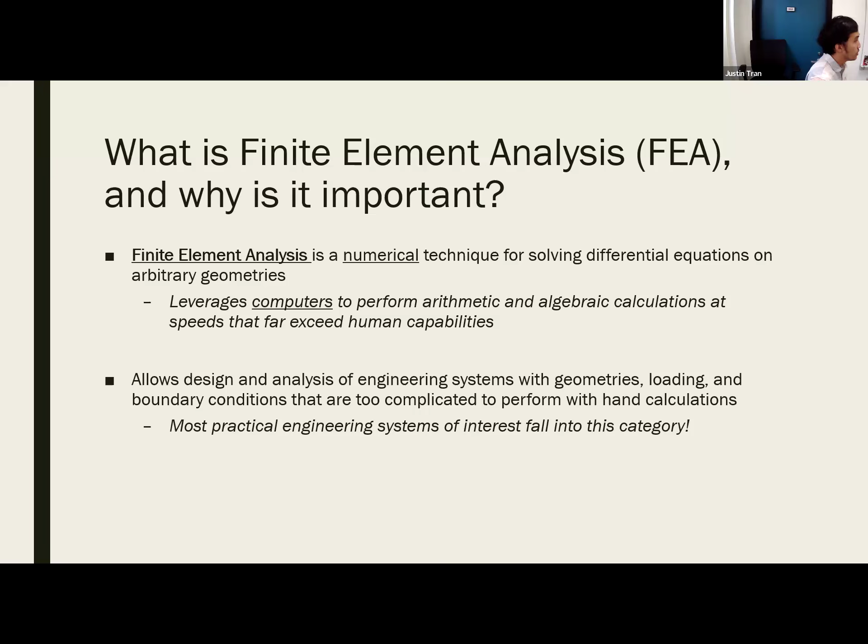So to illustrate this further, when I think of engineering analysis, I think of three broad categories of types of analysis that people generally do.

The first type is what I define to be analytical analysis. This is the traditional pen and paper calculations that you would do in a typical theory-based class. The idea with analytical methods is that you have a governing equation that you're assuming governs your physical system of interest. You solve that governing equation for the variables of interest, and you obtain some result.

The good thing with analytical methods is that it's very fast and inexpensive. Pencil and paper is very cheap compared to an engineering rig or setup, or even just a computer. But you're very limited to very simple problems, because it's very hard to add complexity to these pen and paper calculations.

On the complete other side of the spectrum is what I define to be experimental methods, which would involve actually testing out some physical situation and collecting measurements and data to learn more about the system. The best way to learn about a system is to just try it out, observe, collect data, and see what happens.

Experimental data is always the best. There's very little questioning of experimental results because it actually happened. There's really no question whether this is real or not, because it actually happened.

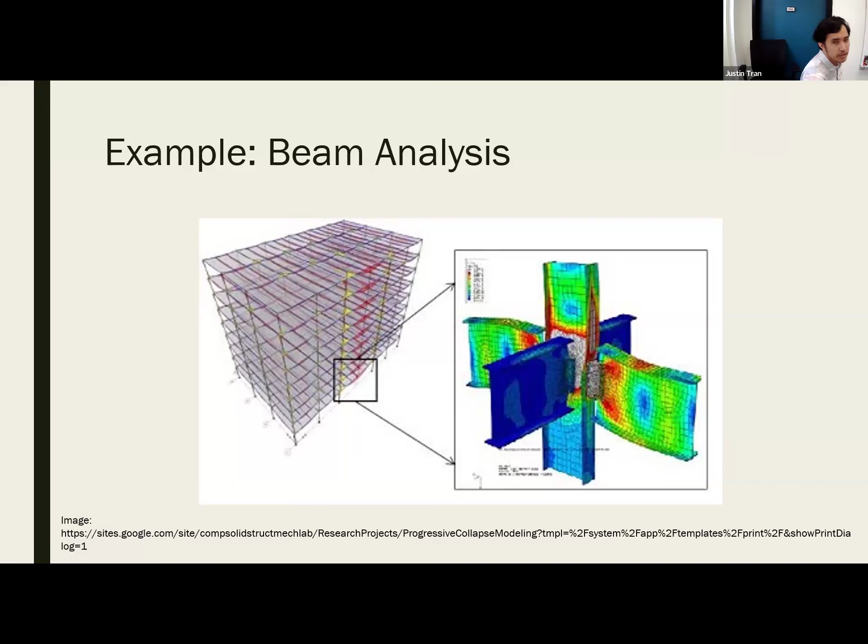One thing about FEA is that you're not just limited to structural simulations. For this class we're focusing mostly on structures, since that's generally the most helpful for mechanical engineers, but you can also run heat transfer simulations and fluid mechanics simulations — we'll touch on that a bit near the end of the summer session. The rule with FEA is that as long as it's governed by a differential equation, you can simulate it.

But once you start to add some complexity, you can see here we have a turbine blade being subjected to hot gases in motion, which heats up the turbine blades. What you're looking at here is a heat map of the temperatures on the turbine blades — very warm near the center, getting cooler throughout. This is not something you can solve by hand practically. You could solve it by hand if you have an entire weekend to do it, but most people don't want to do that — they want to spend the weekend doing other stuff.

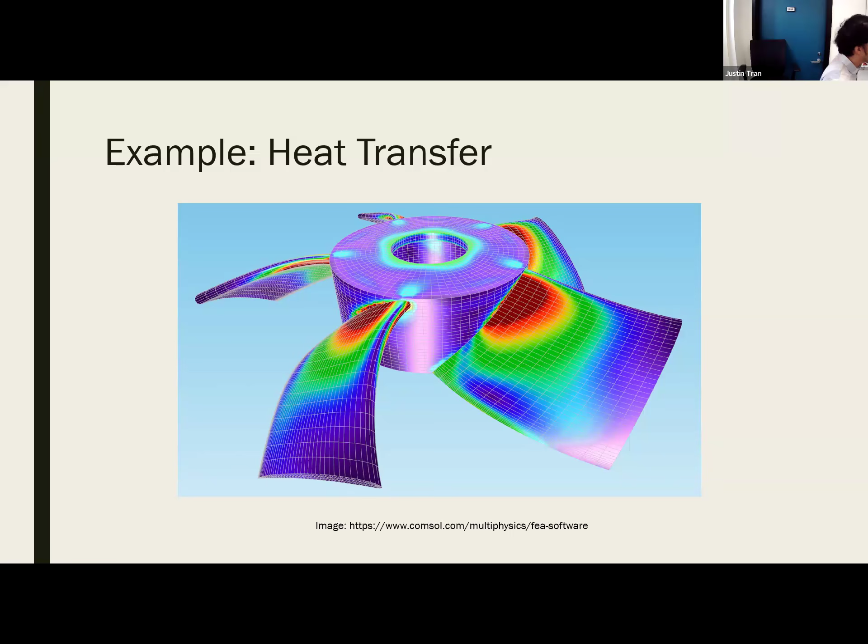So finite elements is a very powerful tool, there's no denying that. I think increasingly as computers get more and more powerful, finite elements is going to be a useful skill to have, because that's something more and more employers are looking to add to their plan. Any questions on this so far?

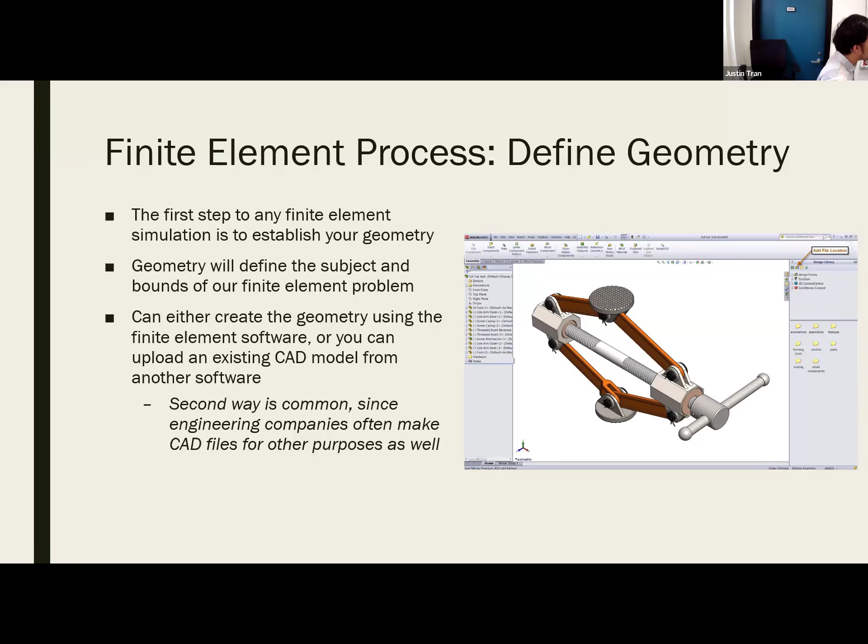Okay, so the first step is to define the geometry. Every finite element simulation requires you to define your domain, the part or system you're going to run the simulation on. For a more applied class like this one, using software like ANSYS, the geometry is defined by a CAD file, usually produced in another software, most commonly SolidWorks, which is taught almost ubiquitously in engineering programs. Sometimes we'll create the geometry within ANSYS itself, since it has some basic CAD tools we'll use in Activity 1. But for the most part, we'll be importing CAD geometry. That's always your first step, because you can't run a simulation without it.

Next, we need to specify the material properties. It's not enough to just define your geometry, you need to specify what it's made of, because different materials behave differently when exposed to forces, loads, and boundary conditions. Whether you have a metal like aluminum or steel, versus a composite material versus a polymer like plastic, all of those behave differently. So you need to specify what material your geometry is made out of, and sometimes you may need to input the material properties by hand.

Quick question: when it comes to SolidWorks, will we actually use the material editing in there, or would we make the geometry and then do editing within ANSYS?

That's a good question. There are ways to import the material editing from SolidWorks into ANSYS, but for this class, I'm going to show you guys how to edit it directly within ANSYS itself, just to be more flexible.

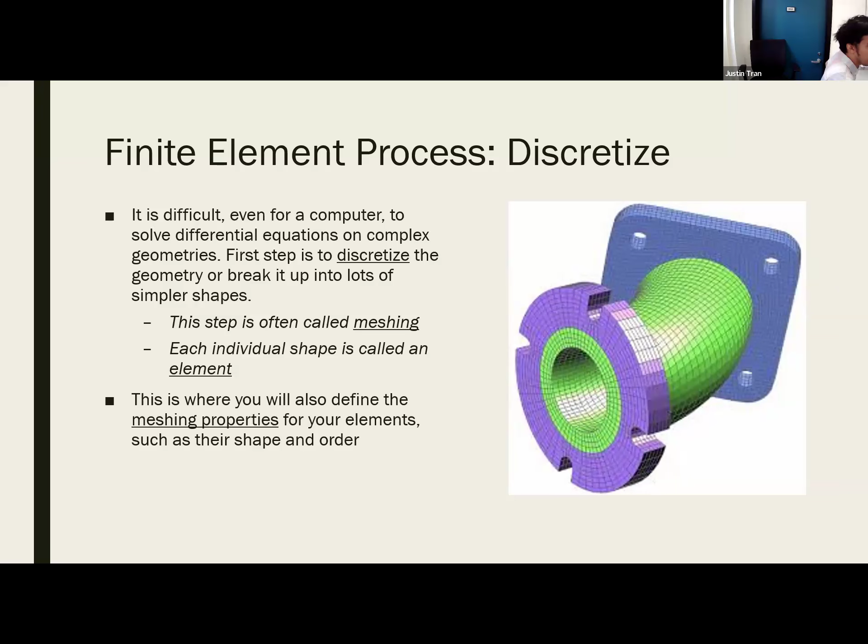All right, next we have to apply boundary conditions. Boundary conditions basically define any kind of external effects or external forces that are going to be affecting your geometry. Because even with a powerful computational tool, it's going to be impossible for us to simulate an entire engineering system. Most of the time you're only going to be simulating just a small portion.

So just take an example. I always get a lot of people from Formula SAE here, and they want to throw their entire car into ANSYS. And I said, maybe that's a little bit too difficult to do. Maybe let's look at a few components together. But when you do that, you have to define how those components connect to other components that are not being simulated at the same time. And that's what the boundary conditions represent.

So any kinds of fixed constraints, any kind of places where your geometry is going to have no deformation, any kind of external forces, external pressures, distributed forces, those are going to be in the boundary conditions. We are going to talk about boundary conditions a lot in this class. Probably meshing is what we're going to talk about the most, boundary conditions probably the second most. How you define your boundary conditions obviously has a big impact on your result, and you want to make sure you do that correctly.

Okay, next step is a step called assembly. If you're just using the software as a user, this is a part that ANSYS essentially hides from you, but it's important to know what's going on. What's happening underneath the hood in ANSYS is that it's generating this matrix set of equations to solve and then solving that system. I would say maybe about halfway through the class we're really going to get into the theory behind finite elements, and you'll see how a system like this is generated from a finite element problem.

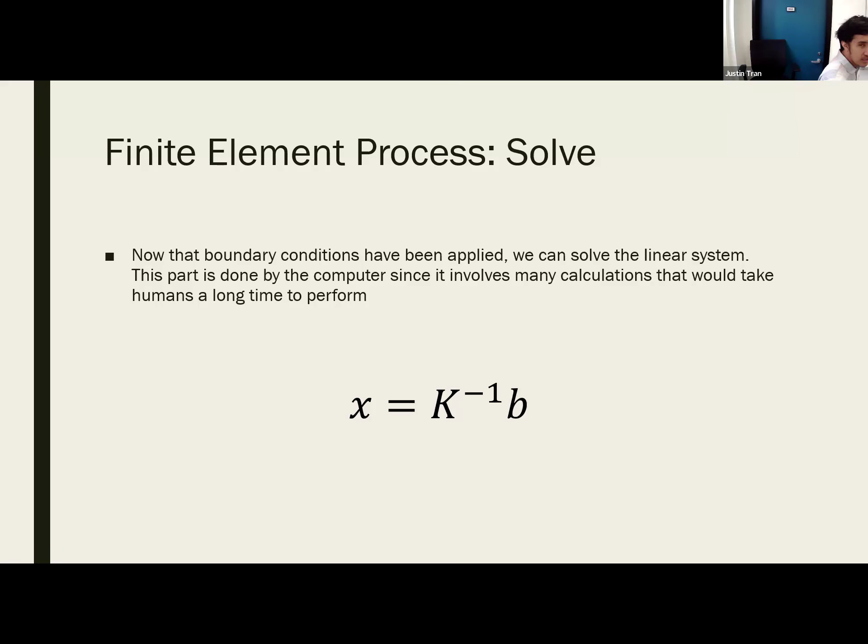Okay, so that's the finite element process. That's something we're going to follow for every ANSYS activity, every project we're going to do together. Any questions on any steps in this process here?

Okay, good. So like I mentioned, we are going to spend some bit of time on the background knowledge, and I get this question every time I teach this class, so I know everyone's itching to use ANSYS, but we do have to learn background knowledge, right?

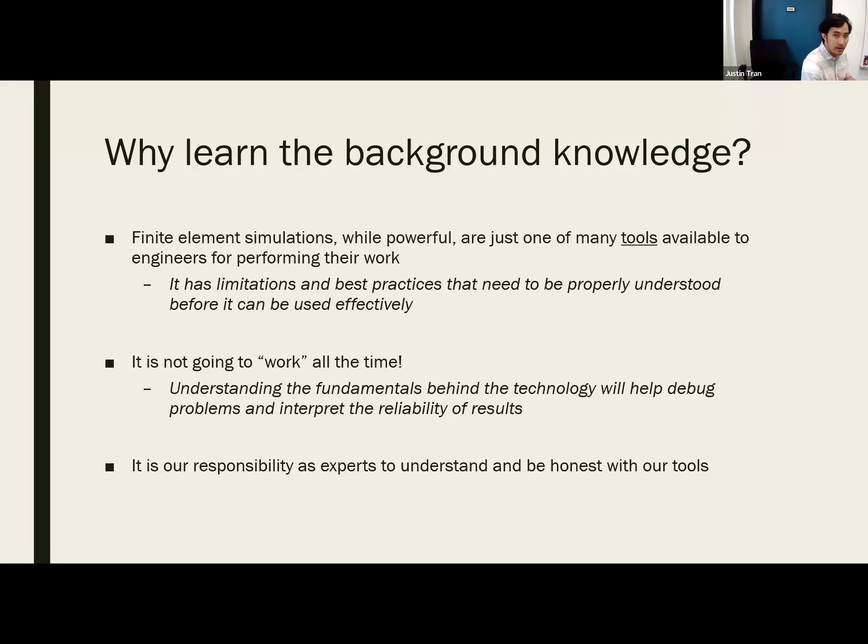Okay, let me give you an example from another professional that I think people have a better understanding of. If you think about your veterinarian—your veterinarian is someone tasked to take care of our pets. On the one hand, we expect them to know procedural skills: how to give a shot to an animal, how to take blood pressure, maybe performing tests on their eyes and ears. But we also expect them to know conceptual information and background information in terms of what they're doing, right?

We also expect professionals to know why and when to take certain actions, like giving animal shots. We don't want them to just randomly give our cat a shot because they feel like it. We also expect them to interpret our pet's signs to know when they're sick.

And it's the same for us. Anytime you have a professional, there's always an expectation that they understand why they're doing what they're doing. That's the reason why you take a course.

Before the syllabus, we have a couple more things to cover, starting with why ANSYS. We're going to focus on ANSYS in this class, but ANSYS is not the only finite element software out there.

There are a lot more specialized softwares for specific problems, and also a lot of generalist softwares. Another one very parallel to ANSYS is called Abaqus. So why do we use ANSYS in this class?

ANSYS has a free student version, which is a big motivator, I'm not going to lie. One thing I'll show you today is how to download the free student version of ANSYS onto all of your personal computers, and that's available for everyone.

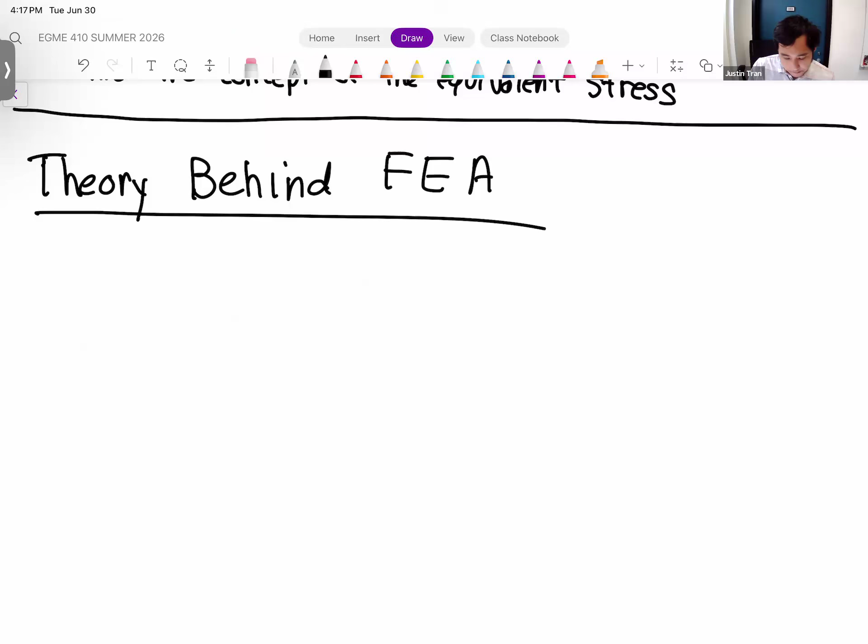Like I mentioned earlier today, for the most part this class is going to be application focused. ANSYS is going to be a big part of what we're doing here daily. But we still need to understand a bit about the theory, what's happening underneath the hood. Because if you don't, whatever software or tool you end up using is just a black box. It's not necessary to understand all the intricacies in the coding and structure behind every software, but you should understand a bit of what's going on so it's not completely foreign to you.

Okay, so just to remind you about finite elements: finite element analysis is basically a technique — not even really a numerical technique, but a technique — for solving partial differential equations.

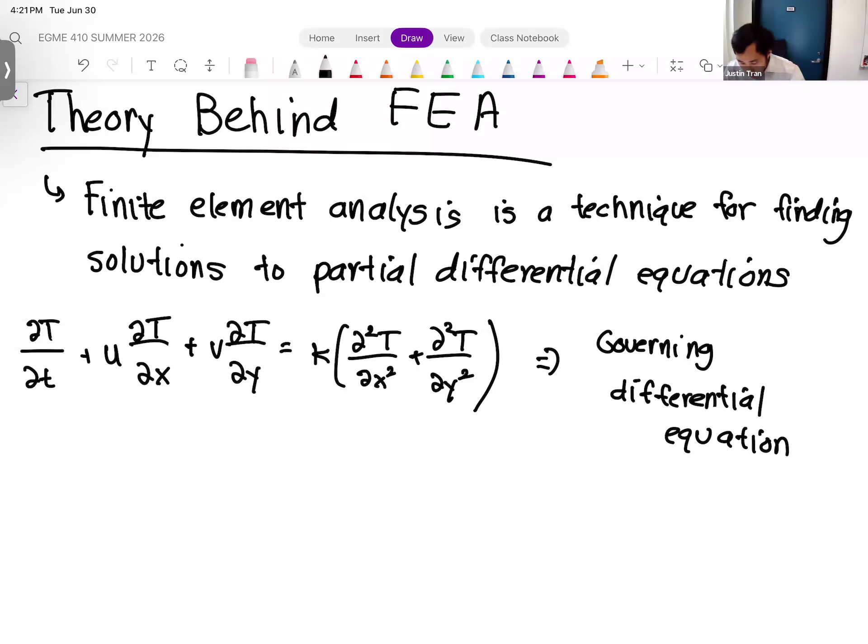Every physical system has something like this. For fluid mechanics, we have the Navier-Stokes equations. For solid mechanics, we have the equations of elasticity. There's always going to be some underlying equation, and even if it's not obvious, there's probably some fundamental conservation of energy, conservation of momentum, or conservation of mass equation that you can use to form an equation like this.

And so the idea with FEA is that we can apply it as a technique to transform this. The idea is to take a problem governed by this differential equation, but instead of solving that differential equation, we solve a different mathematical problem - an algebraic one instead. So by utilizing FEA, we transform this into a matrix set of equations.

I've just drawn generic matrices here, but what we've essentially done is transformed this into a matrix set of equations - our traditional N equations and N unknowns. So here we have a square matrix of coefficients that's going to be multiplied by a vector of unknowns.

The unknowns are typically what you're solving for - things like temperature, deformation, stress, and so on. And on the right-hand side, that's where we have external effects like forces and boundary conditions.

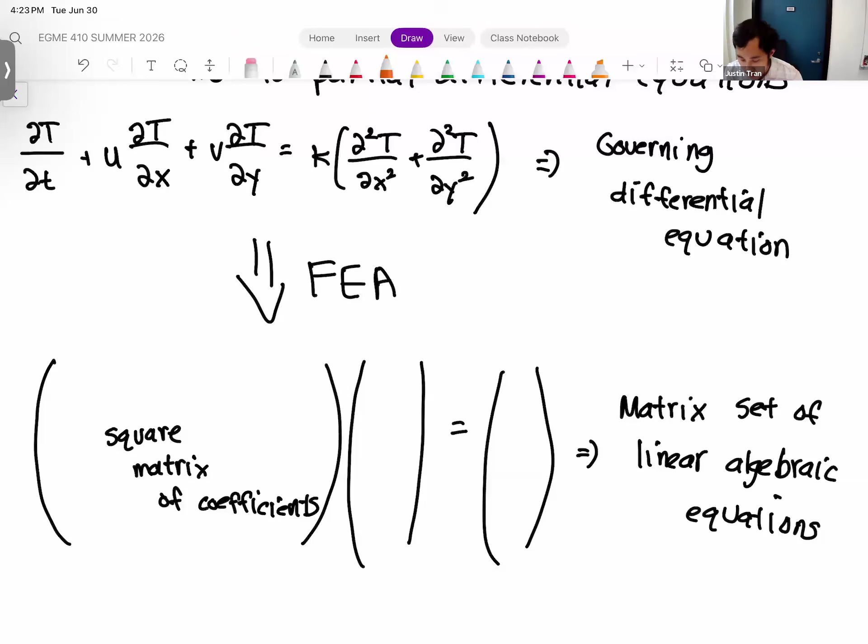This matrix, as I mentioned, often has millions and millions of rows or columns. So we have a mathematical problem that's impossible for humans to solve. We go through all this effort through FEA, and we get a mathematical problem that's impossible for humans to solve. So you can see why people were not too impressed with FEA to begin with.

But as computing and computers developed, we found out that computers are very good at certain tasks, and one thing computers are very good at is algebra. That's when FEA really started to take off, as we found that the way computer processors are designed, these linear algebra problems are very efficient to solve.

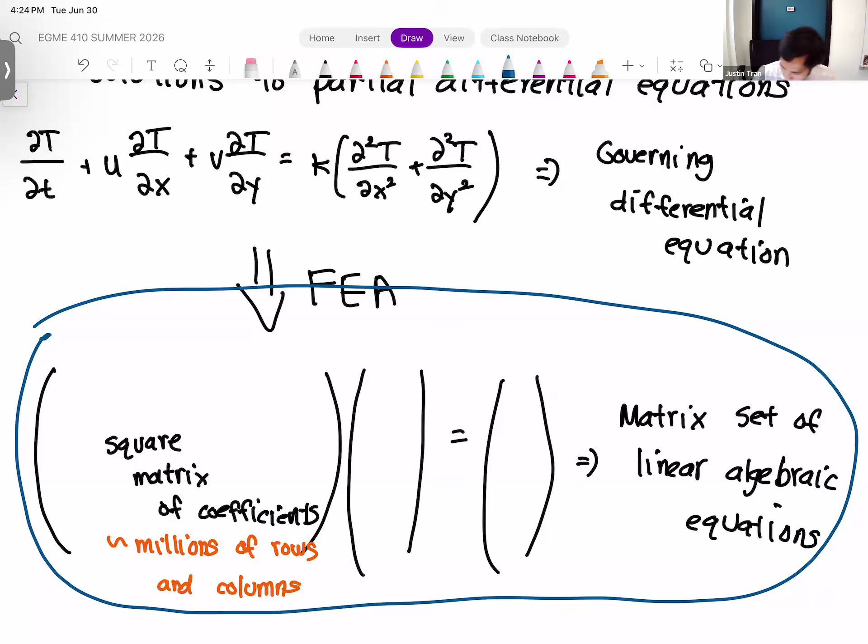That revelation spawned a whole set of different computational techniques and tools, and we're still making use of it today. A lot of what we understand about artificial intelligence, the dominant methods for training these networks, are based on linear algebra.

So basically the gold rush of computational engineering is that if you can take your problem and formulate it in terms of an algebraic system of equations, then you have a computational technique on your hands, and maybe something that's going to redefine an entire era of technology. FEA was obviously developed a lot earlier than AI, and this was kind of the main method that sparked that.

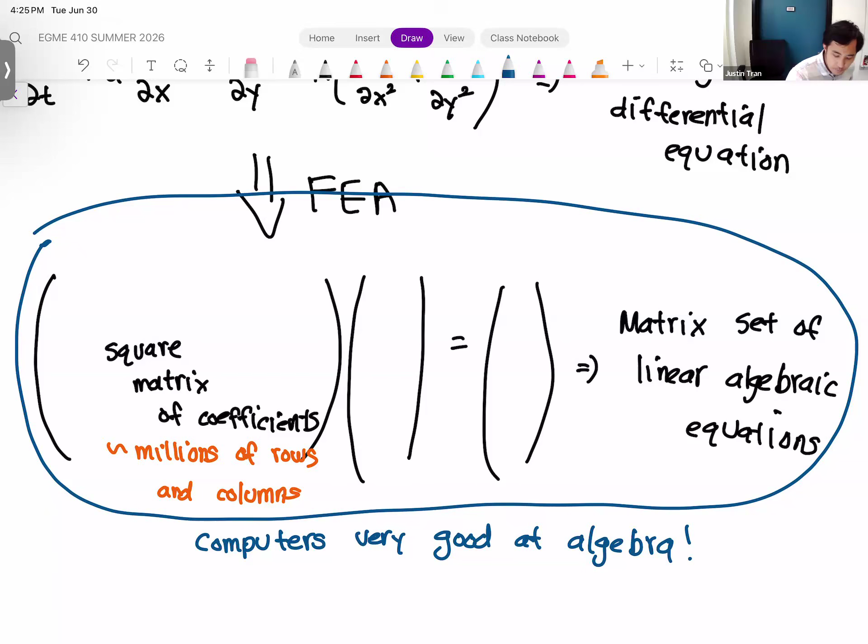Once that connection was formed, people started to connect the dots with everything. People started to realize, at least from an engineering perspective, that most engineering systems are governed by physical laws - conservation of mass, conservation of momentum, conservation of energy - and those have corresponding partial differential equations.

So whether you're designing a building or designing a heat pump, there are governing equations that govern this behavior. We can use FEA to basically formulate those governing equations for a specific system into a set of algebraic equations.

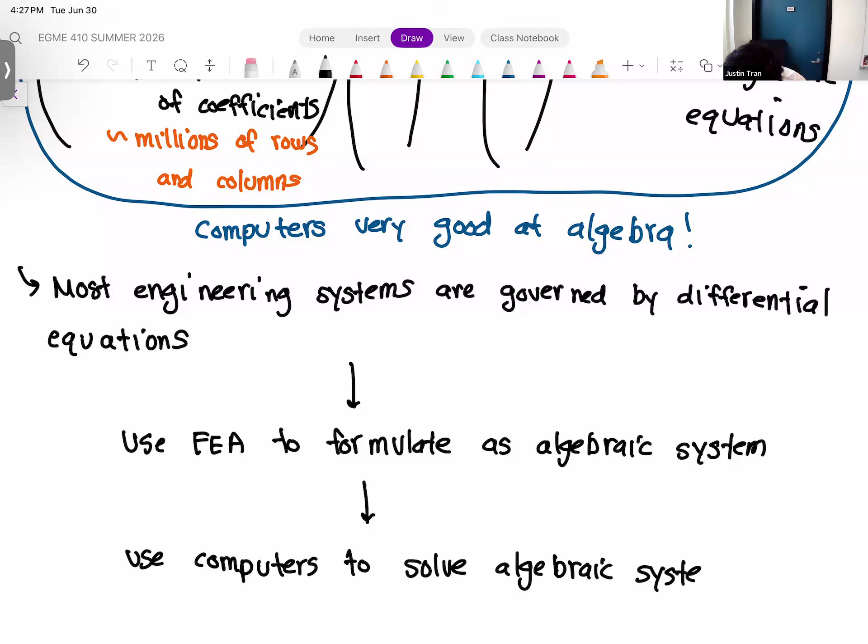And then once we have that solution from the computer, we can use that to inform our engineering work, whether we're doing design work or analysis work. This really started to become a tool that we can use for any kind of engineering work.

So that's kind of the thought process of using FEA. And eventually from this, a lot of different softwares started to form, just because even though it is possible to write your own FEA code, if you eventually come back for grad school, we do have a course on that. That's 541, I just taught that this past spring.

If you were interested in learning how to do that, there are methods. But I would say for the most part, most engineers and most people that use FEA use it as a user, not necessarily from a developer's perspective. So that's the nitty-gritty of FEA in terms of forming this algebraic system and writing the computer code to solve it. Most people are not that interested in learning about these things, and so these are the parts that are automated by the software.

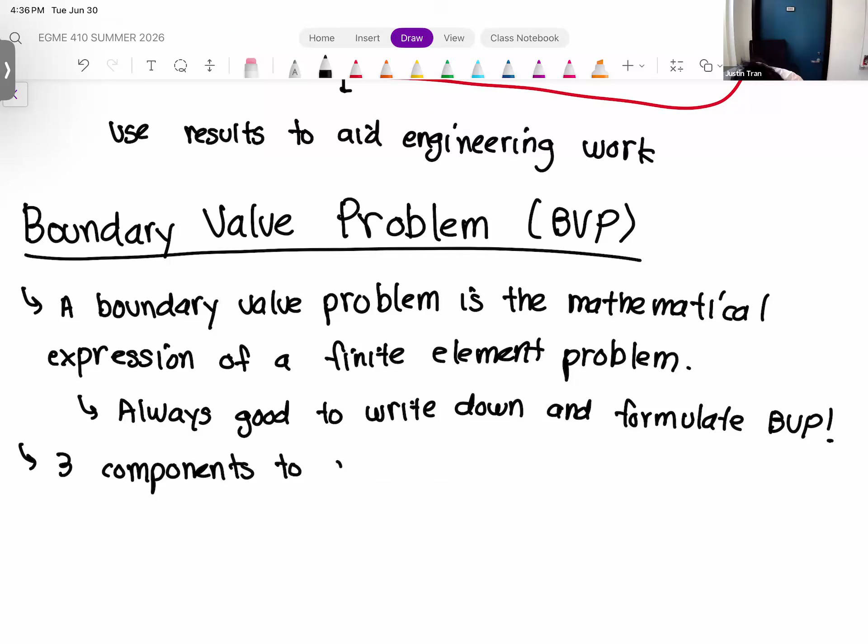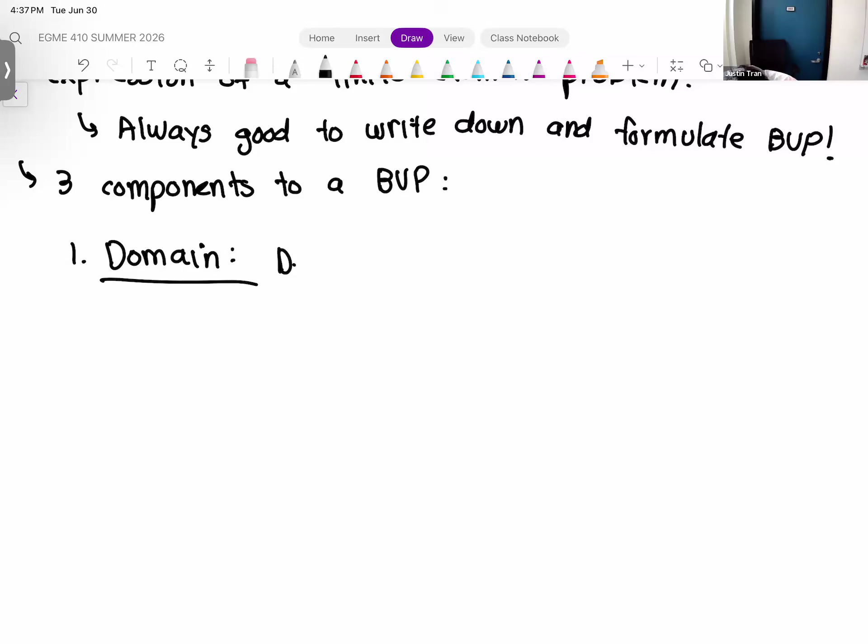For boundary value problems, there are really just three components to know. The first is your domain. The domain is another name for what we call the geometry - it defines where and what we want to solve our equation on. For the most part in this class, our domain is going to be defined by the CAD file that we import into ANSYS. So the CAD file defines the geometry on which we're going to solve it.

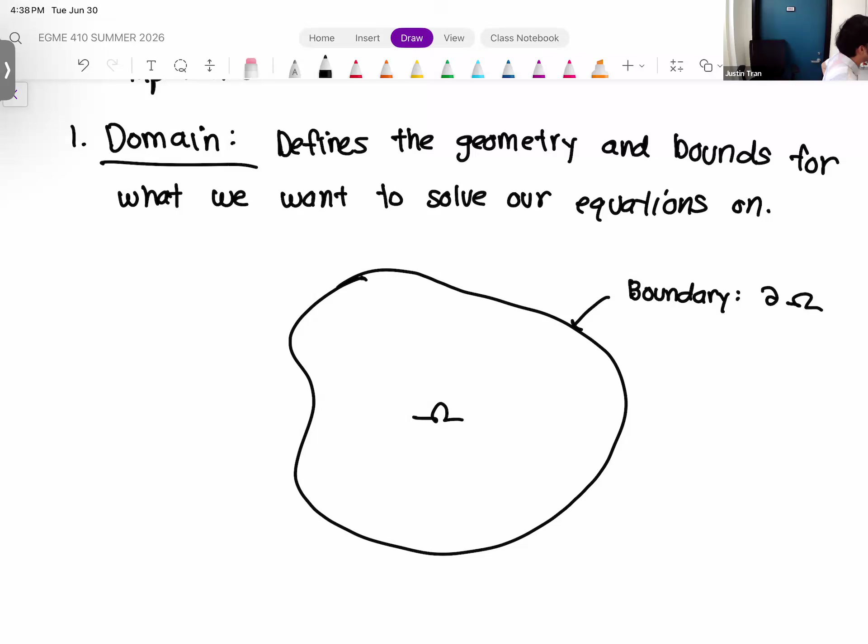A little bit of terminology: for a typical boundary value problem, let's say we have our generic domain shaped like a potato. The domain itself is usually given the symbol omega, and the boundary of the domain is usually defined as partial omega. That's the notation typically used in textbooks and scientific papers. We're not going to use this notation all too much in this class - I'll typically just refer to the boundary as the boundary, but this is the terminology and convention typically used if you read more.

This may seem like the most obvious part of a boundary value problem, and it's not the part that people think about, but it's always good to ask: what is an appropriate domain? What is an appropriate geometry for the question I'm trying to answer with my simulation?

Because sometimes it may not be obvious, your choice of domain and your choice of geometry often has a big impact in terms of how much you can do with the simulation, just because of the limitations we have with the computers and the software here. But it also has a big impact on the cost as well.

So I'll give you an example. This was several years ago, so I think it's safe to tell this story because that student is long gone. For a student's final project, they were interested in simulating a workout station at a gym. Specifically, they were looking at one particular machine, which was seated rows.

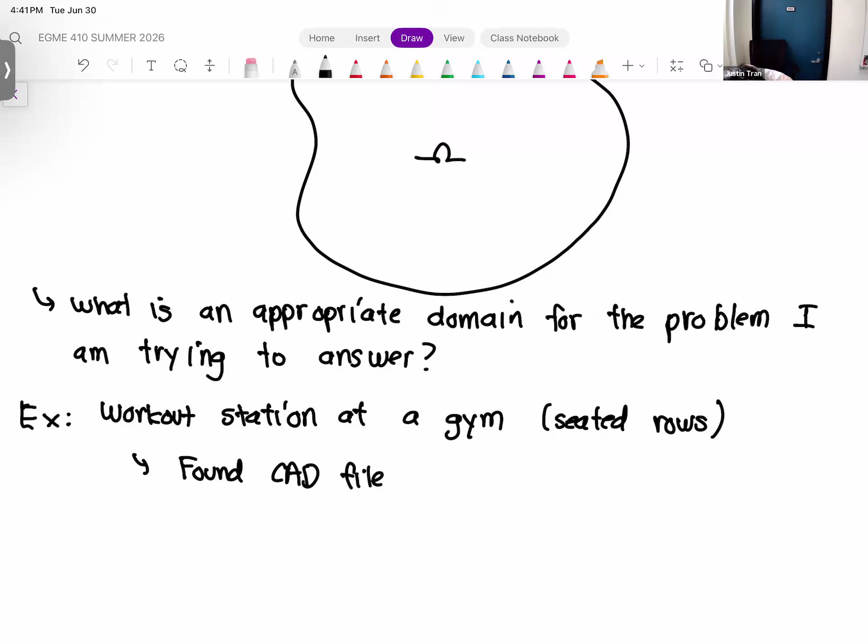Naively, what they did was take that CAD file, import it into ANSYS, and try to run an analysis on it. They were having a hell of a time trying to mesh it because of the complexity of the geometry.

So the student comes to me and describes everything going on, from the perspective of, 'Professor, I'm getting these error messages in ANSYS when I'm trying to mesh, and I'm not quite sure what to do.' I rephrased the question and asked, what aspects of this machine are you actually interested in analyzing? We talked it through.

It turned out they were actually only interested in the load-bearing components — the parts of the machine that are going to be under stress when someone does a seated row. So it wasn't necessary to model all of the other components that don't contribute to that load-bearing portion.

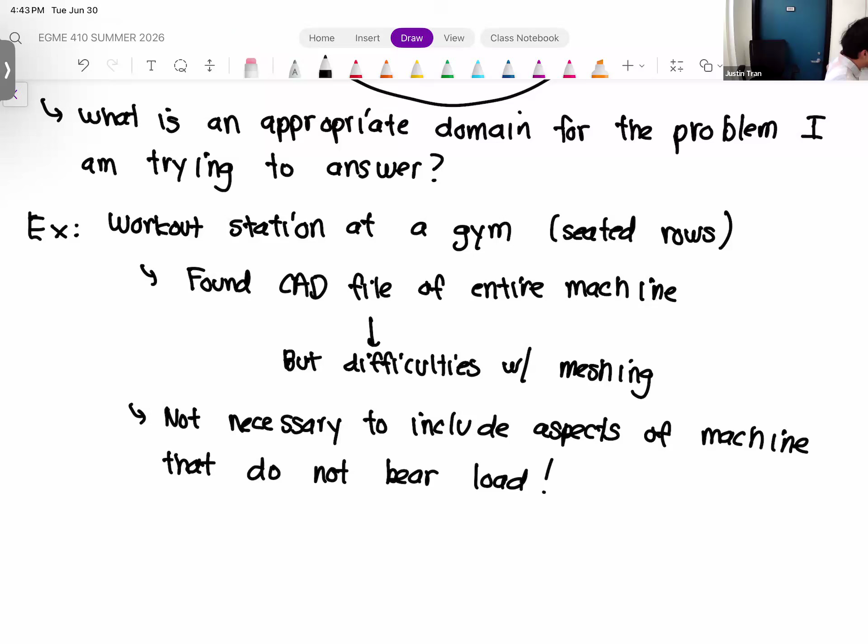All that extra geometry does is add complexity to your simulation. It adds a lot of dead space — things the simulation has to mesh just because that's a requirement, but that mesh isn't doing anything. It's just adding cost and complexity for almost nothing.

Through that process, we were able to extract just the components he needed, and he had a much easier time running the simulation from there.

A lot of times, what may seem like an obvious question — what's your domain, what's your geometry — when you think about it from the perspective of running a simulation in ANSYS with finite elements, every portion you include in the CAD file is going to be simulated. So the question rephrases itself in an interesting way, because you have to think about what's actually necessary for you to do this analysis.

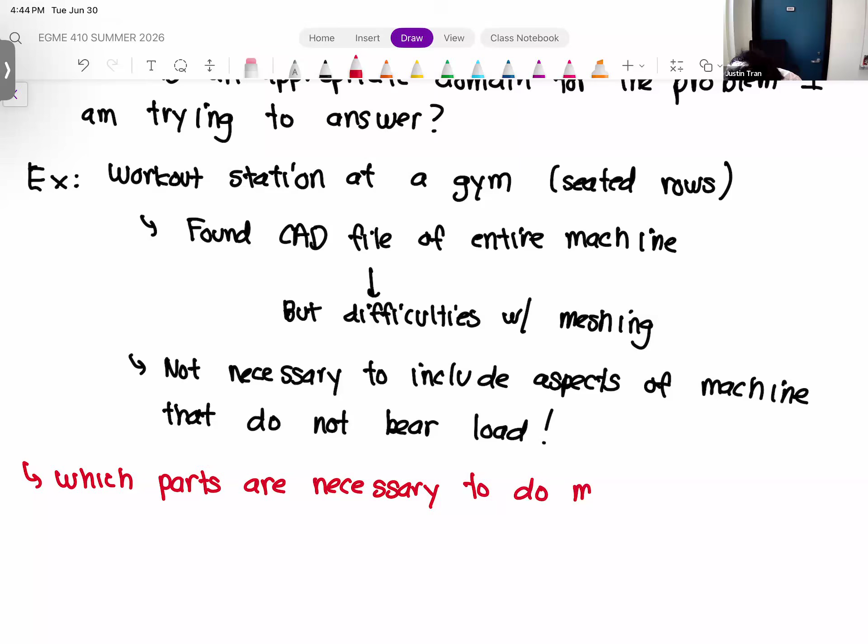Again, the answer may not always be obvious, because a lot of times when you create a CAD file — probably what you're accustomed to if you've taken the SolidWorks course — you're creating it to showcase all of the different geometrical features of your project, often so you can eventually machine or manufacture the part.

But when you import a CAD file into ANSYS, you're answering a very different question, or using it for a very different application. Usually not every aspect of your geometry is going to be important or necessary to run an FEA simulation. So as we start our activities and get more into meshing, think about what parts of a CAD file are actually going to be necessary for the analysis.

So the domain is the first component of a boundary value problem, and there's already a lot of interesting questions for us to answer here. Any questions on this?

All right, so the next component of a boundary value problem is your governing equations. These basically define not only the type of physical behavior you're going to expect from your system, but also what kinds of outputs you can expect from your simulation results.

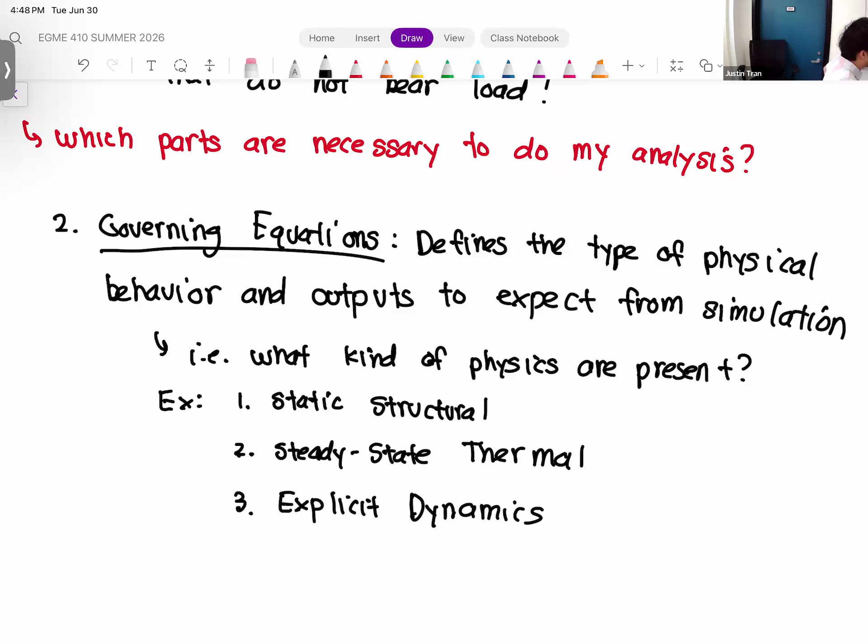There's going to be lots of other types of examples as well. When we open up ANSYS for our first activity, you'll see all the different types of physics that are there. What you need to do when forming your boundary value problem is ask yourself what physics are going to be relevant for my situation. Sometimes it's very simple - sometimes it's just a single type of physics that we're going to be expecting.

Those are the best situations, in the fact that we only have to solve one type of equation. It ends up being very, very simple.

So the first activity that we're going to do should be in this category here - we'll have just one type of physics to do, and that makes our solution very simple. But there are a lot of very interesting problems where we're actually going to combine multiple types of physics together.

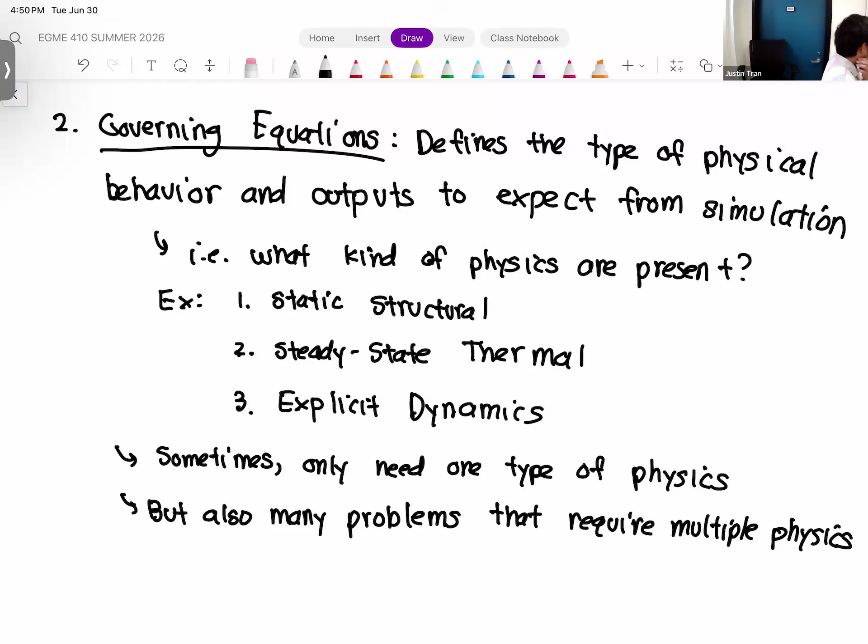This was also a final project of a student group, maybe two years ago, and they were interested in simulating the physics of the brake rotor in their car.

This one I can draw because the geometry for this is a little bit simpler. So basically they have this disk, and the idea is that this disk, when the car was braking, was going to be pinched with the brake pads at this location here.

The simulation or situation they were trying to simulate was, as the brake pad pinches on the rotor, it's going to generate heat. Because all the kinetic energy the car had as it was in motion needs to be dissipated so the car can come to a stop. So that energy has to go somewhere, and it's generated as heat due to the friction between the brake pad and the rotor.

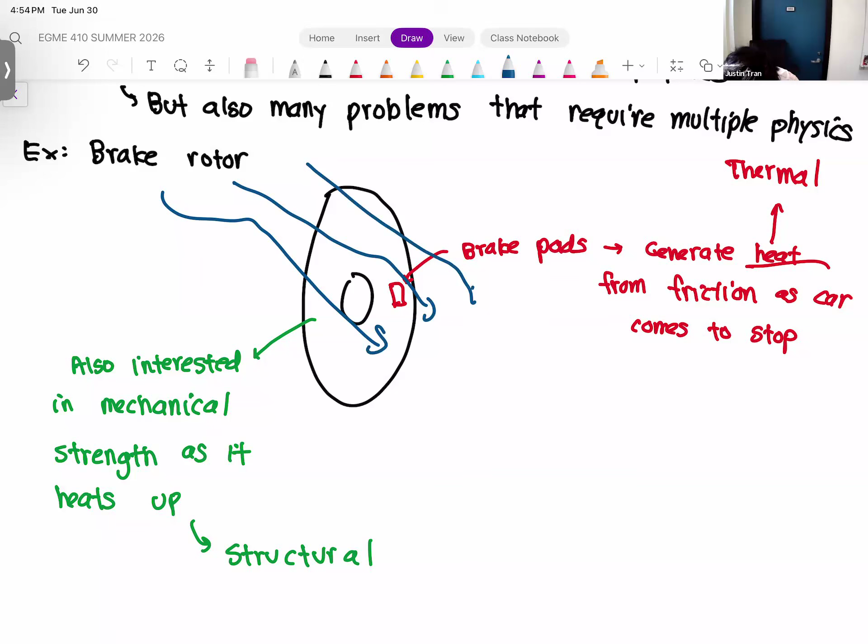What they also said is that as the car was moving, this rotor is also going to be cooled by air, just because air is going to be flowing past it. I think what happened was that they ran the simulation and found that if they didn't add the air cooling, the rotor would just melt because the heat had nowhere to go. So they had to offload that heat somewhere, and they had to add fluids to their simulation in order to get that going.

So air is a fluid, right? And as the air interacts with the rotor as it goes around it, we need to solve the fluid mechanics equations as well. So it very quickly became a very complicated situation.

So this is not a typical project, this is not what I expect for the final project. I just thought it was a very cool example, and these students did a very good job. But you can see we're solving three types of physics all at the same time - heat, fluids, and structures together.

And ANSYS does give you the ability to do this. But I bring this up just to give you a sense of, to think about, what are all the relevant physics, what are all the relevant mechanics that are going to go into the phenomenon that you're trying to simulate.

So again, for the majority of cases that you're going to look at, it's going to be a single physics type system. But if there are multiple types of physics going on, you need to make sure that you account for that. Otherwise, you're not going to get the full picture in terms of your simulation results.

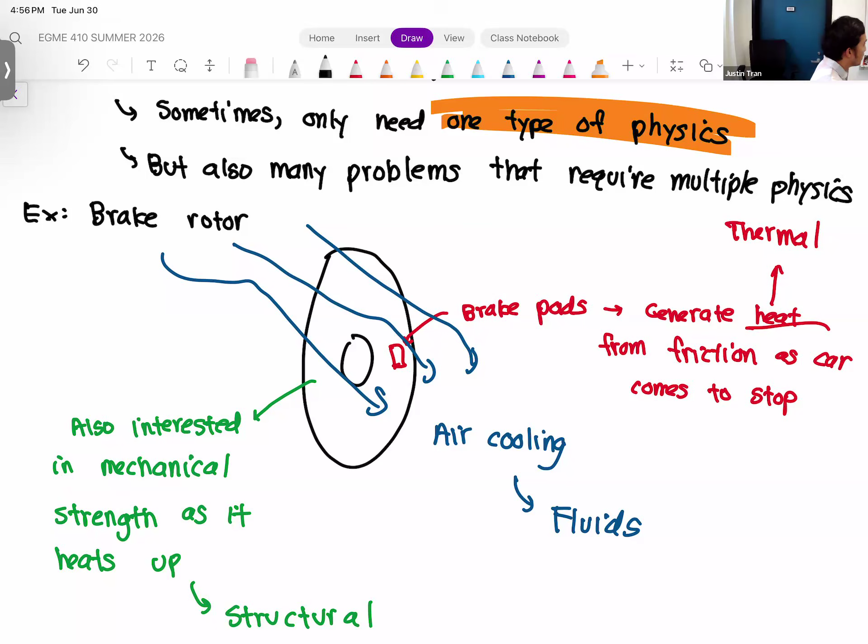And I think once you see the full list of physics that are available in ANSYS, it seems intimidating at first, but it's more of a game in terms of trying to find what you need for your particular job.

So governing equations is the second aspect of a boundary value problem that we need to know. The last aspect is also something that you need to specify explicitly when you run an FEA simulation, which are the boundary conditions.

So just like the name implies, boundary conditions are the conditions that we specify at the boundaries of our domain. More specifically, any kind of external effect that is going to be affecting the behavior of our system, we need to incorporate that somehow into the boundary conditions.

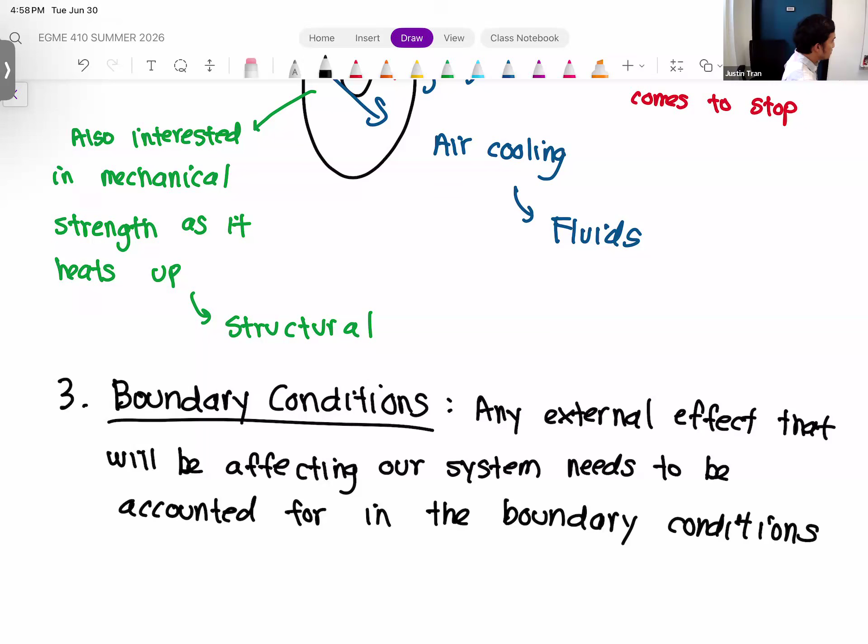So for example, some boundary conditions that we're going to see very commonly in this class, one of those being what's called a fixed constraint. A fixed constraint is what you're going to apply to certain aspects or areas of your geometry that are not going to move. So let's say that your part or your system is being attached to a bigger system - that's where we're going to apply our fixed constraint.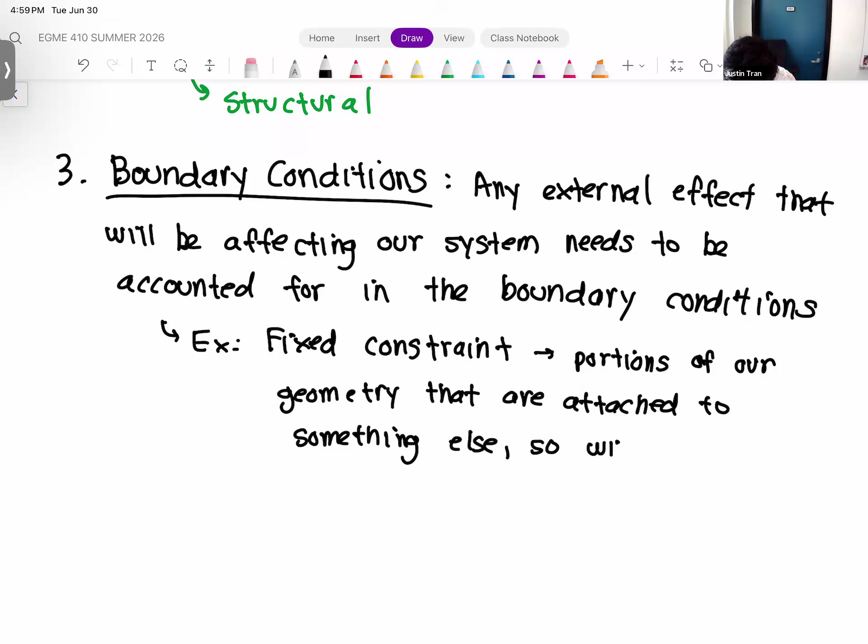Right, so we'll talk about this a bit more when we dive more into boundary conditions. But for most simulations, or for all simulations, you need to have at least one fixed constraint in your system, because that prevents rigid body motion.

Another very common boundary condition that we're going to be applying is some kind of external force or external pressure. And obviously, for these boundary conditions, these are specifically for structures - if you're going to be running a thermal simulation or a fluid simulation, your boundary conditions are going to be different as well. But any kind of way that a force is going to be applied onto your system, we have to include that in the boundary conditions as well, because that's going to cause your part to deform.

So one thing you're going to have to do, because a lot of times when you're looking at a physical system that you want to simulate, it's not going to be labeled explicitly telling you to apply a force of 1,000 newtons at this location, or apply a fixed constraint here. So your job as an engineer using FEA is to interpret a physical situation and think about what type of boundary condition best fits this physical phenomenon.

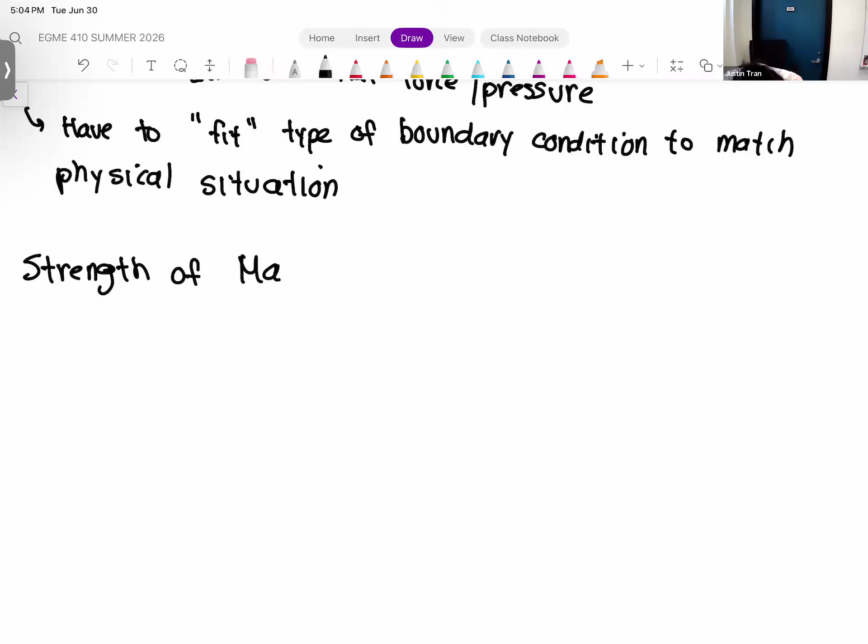The other topic I wanted to go over today is a review of solid mechanics, or strength of materials—that's how I learned it. So a bit of a big shift: in a normal semester this would take place on a different day than what we just discussed, but with a 3-hour session we have to cover it on the same day. So we're shifting from FEA to more solid mechanics.

Okay, I did want to cover this before our first activity, because tomorrow we're going to be simulating basically the first ANSYS simulation everyone runs: a plate in tension with a hole in the middle. There's going to be concepts of tension, compression, stress, strain, failure, and factor of safety, so I want to make sure we're all on the same page. If this is just a refresher and it's boring, that's great.

Okay, let's go over the concept of stress. When we talk about strength of materials, when we talk about solid mechanics, we're explicitly thinking about structures or geometries that have forces and loads being applied to them.

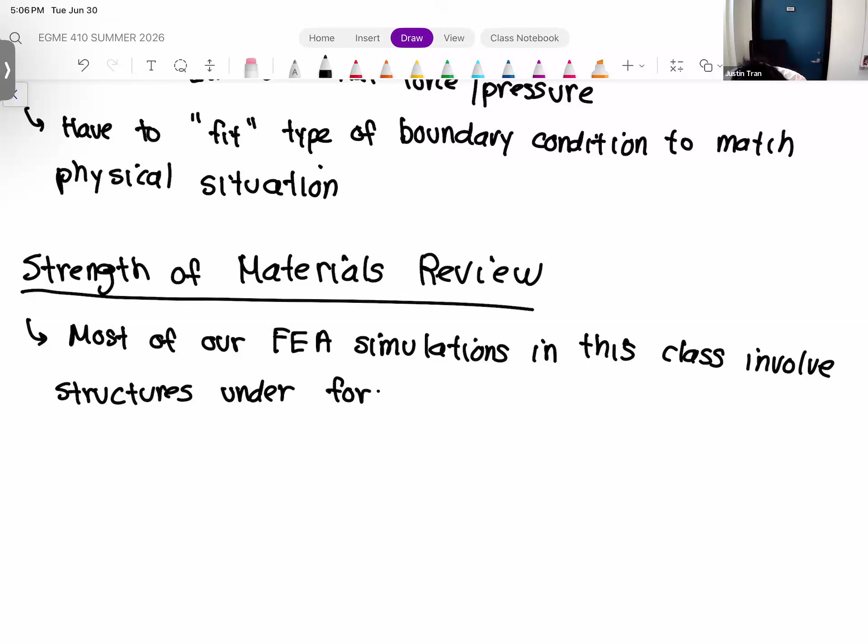I think every one of our ANSYS activities are going to do that. Now, that's not the only thing FEA can do. FEA can also do thermal simulations, fluid simulations, electromagnetism. But because of where this class is in our curriculum and our prerequisites, we're going to focus mostly on the structural component - structures subjected to forces and loads. A few things are going to happen in those situations. On one hand, when you apply a force to an object and the object stays relatively still, it tends to deform.

And of course, that's assuming there's going to be no rigid body motion that takes place, so the object is not going to be traveling anywhere. We're looking at just pure static structures. And of course, we're also going to assume the part is not going to fail - we're not going to stress it to the point where we get plastic deformation and fatigue.

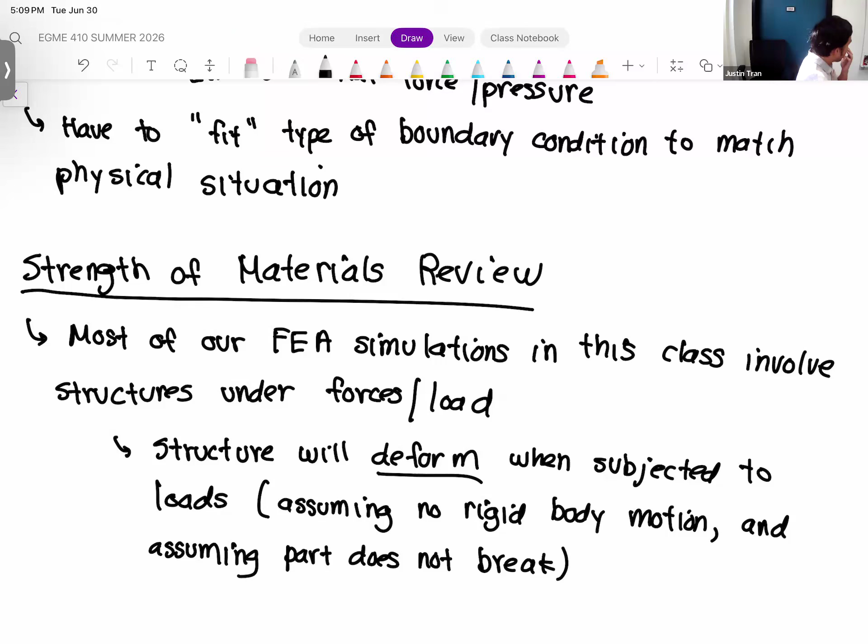So the structure will deform when you expose it to those forces. The other thing that's going to happen is that stresses will develop internally within the structure as well.

So to answer your question a bit more - even if we're just looking at a pure linear situation where the part will just keep deforming, you can actually tell from the stresses that this is not going to be realistic, because the stresses you're going to see are going to be way past the breaking point or the yield limit of the material.

So we're going to review just a few concepts regarding this, to give our activity some context for tomorrow. Let's start with stresses. A stress is essentially a force - well, the pure definition of stress is just a force that's distributed over an area. Stress develops within a structure to make sure that every single part of that structure remains in static equilibrium.

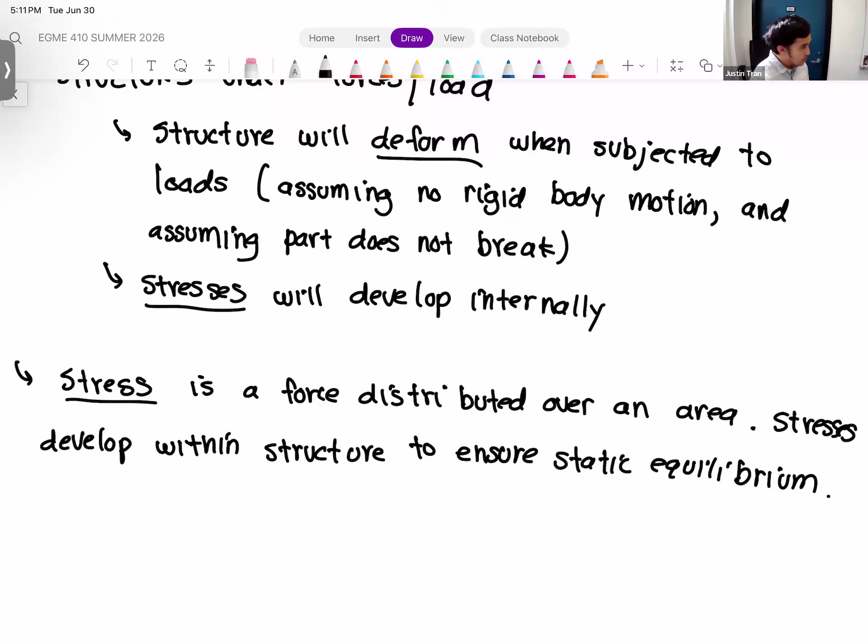Okay, so let's go ahead and look at a very simple case here. You've probably seen this before - this is probably one of the first examples you see in solid mechanics. So let's look at a simple rod in tension.

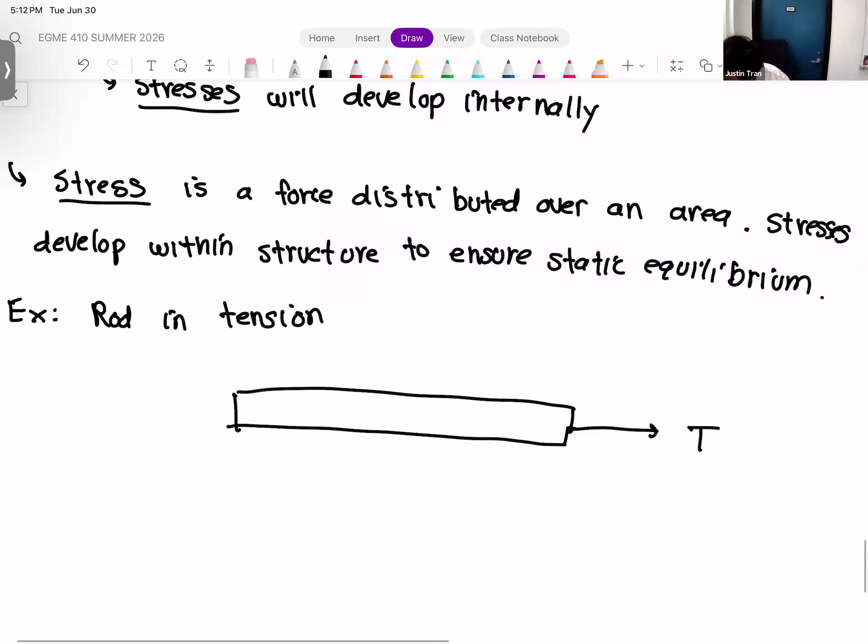So if we have a rod here, it's kind of a slender structure, and we apply an equal and opposite force on both sides. Let's say we apply a force T going to the right on the right side, and an equal and opposite force on the left side. If you sum up the forces on the structure, all the forces are going to equal 0, so there's going to be no motion, no acceleration. But we know that this rod is going to deform. Granted the amount of tension we apply is not too severe - let's say it's fairly moderate - we expect this rod to elongate slightly.

Right, so as a result, I can use yellow. We expect this rod to elongate slightly, maybe thin out a bit, kind of near the middle.

So these are the types of situations we're going to be looking at, although not nearly as simple as this. There's no point in running a simulation on a rod in tension, but the same idea applies where we have forces applied onto an object, and the object is going to deform in some way, while the overall structure remains static.

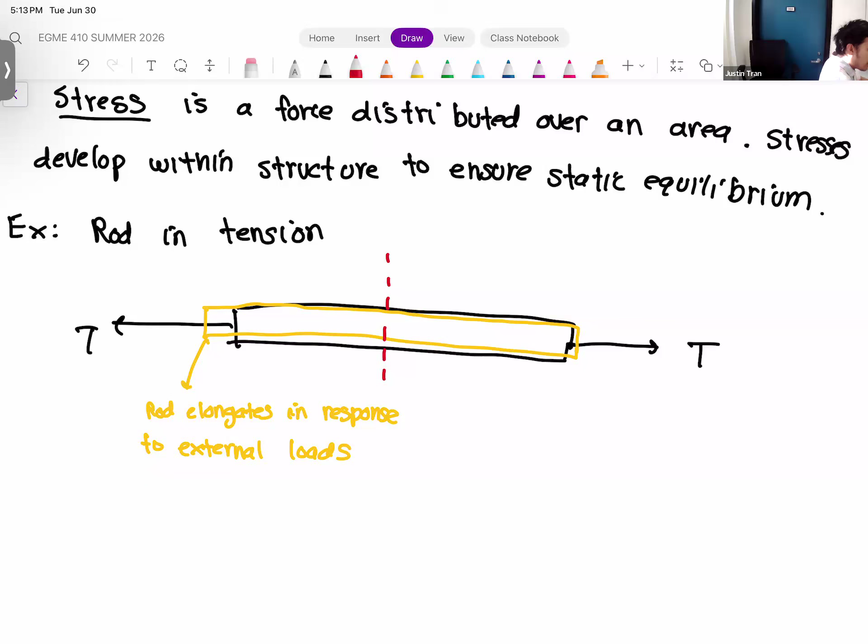There's going to be no dynamic or rigid body motion. So if we take the structure, let's say we look at a cross section, making an imaginary slice down the middle of this rod. If we take that slice, let's say we take the left portion of this rod and draw a free body diagram. We look at just this portion here. We've included the left end of the rod.

So there's going to be a tensile force going to the left.

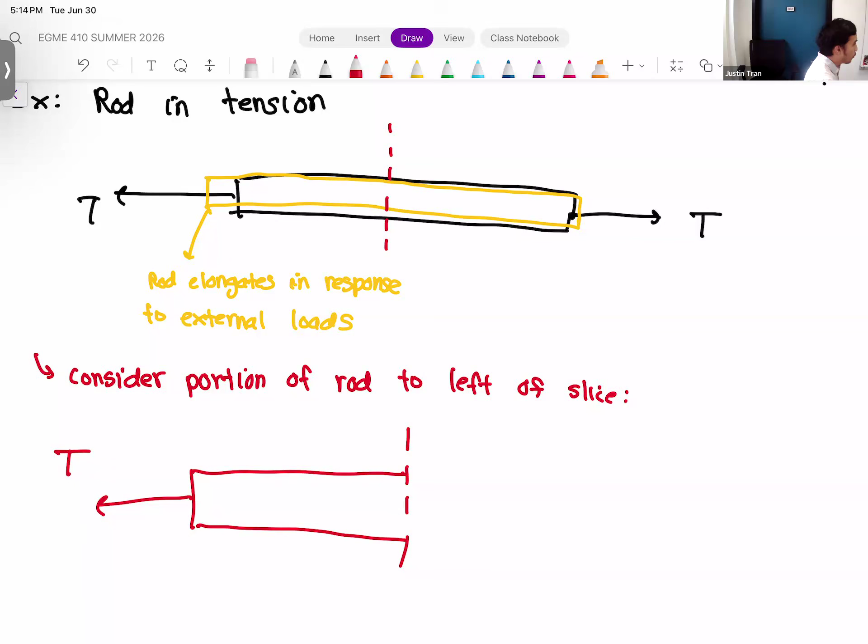But what we're saying is that this slice here, even though we're not looking at the entire rod, we know that this slice is part of our original rod. So this slice here should also be in static equilibrium. In order to maintain that, there has to be an equal and opposite force on that slice that opposes the external tension.

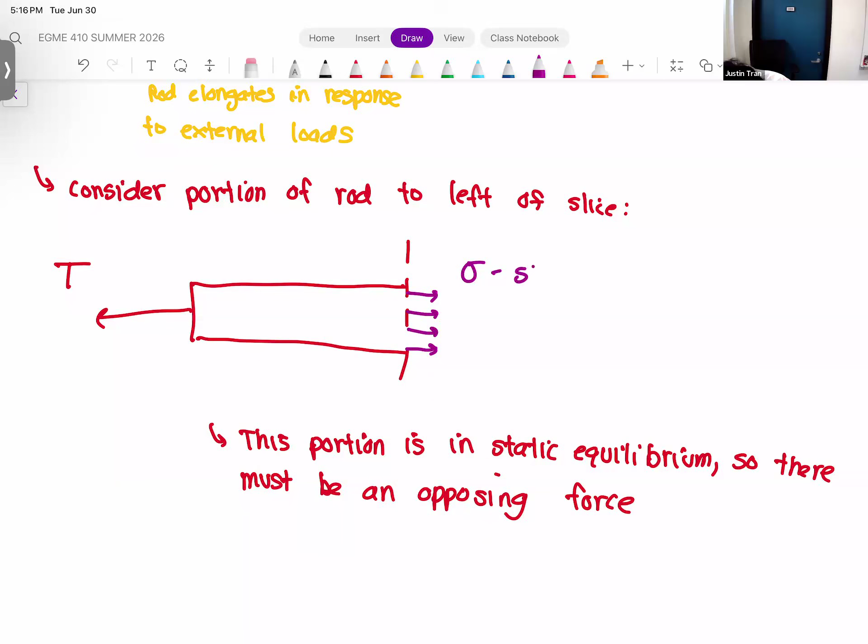So there has to be an opposing force that opposes that tension, and what develops here is our stress. What we know from solid mechanics is that there's a stress that develops on the interior of the rod, which typically we call sigma. That stress is what develops internally so that this particular portion of our rod maintains static equilibrium. The sigma here is the stress, where in order to maintain static equilibrium, the stress has to have the value of the tensile force T divided by A, where A is the cross-sectional area of the rod.

So that's the idea with stress. In order to maintain equilibrium at every single portion, at every single slice of our structure, these stresses have to develop. Otherwise, our structure would just kind of break apart.

So when we run the simulation tomorrow in ANSYS, one of the primary outputs that we're going to look at is the stress distribution. There's a lot that we can glean from that stress distribution, because that's going to tell us what are the areas that are at risk of failing. That's going to inform our factor of safety, things like that.

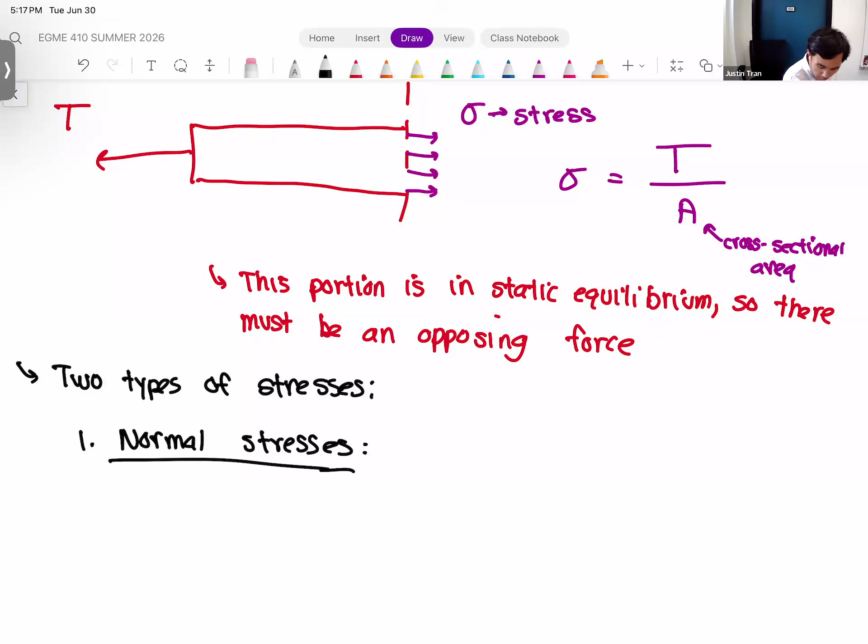And what you should also remember from solid mechanics is that there are multiple types of stresses, at least in terms of direction. On the one hand, we have normal stresses. Normal stresses are kind of what's illustrated above. Normal stresses act perpendicular to whatever surface that we are considering.

And so normal stress would look something like this. Let's say we make a cut plane like that. Any stress that is pointing in the direction perpendicular to that cut plane is a normal stress. Normal stresses are very common, so usually when you subject your structure to any kind of tensile or compressive force or bending force, it's primarily going to be normal stresses that develop.

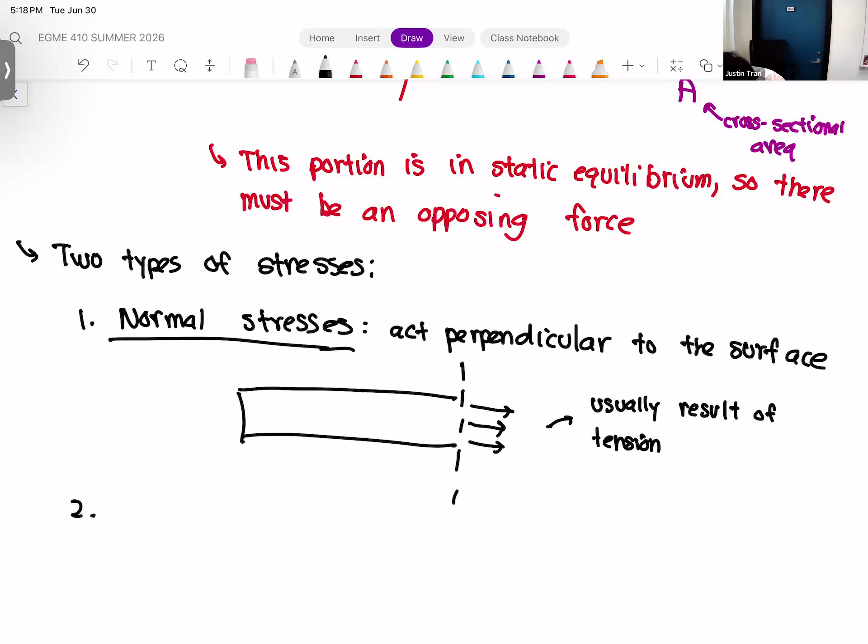The other type of stress is a shear stress. A shear stress is defined as any stress that acts parallel to a cut plane or surface. To illustrate that, let's say we have a structure like this. A shear stress is going to act parallel to whatever plane that we have.

Typically, if you're designing an engineering system, you want to avoid shear stresses, because for a lot of very common engineering materials—I want to generalize that even more—but most materials are going to be much weaker in shear than they are in normal stress.

So if you have a relatively well-defined engineering system, hopefully you're not going to see too much shear, but it is something to consider and be aware of. If you do see a large amount of shear, that might be a risk factor you have to consider. But for most everything in this class, we are going to be looking at normal stresses for the most part.

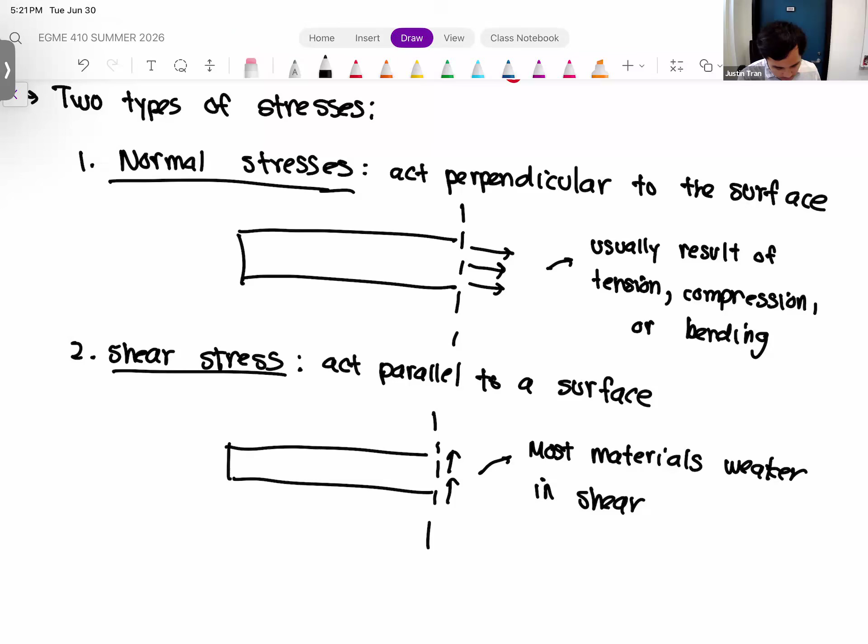Okay, good. All right, and so with that, let's see, just in the interest of time, let's go over the idea of the equivalent stress now.

So, kind of what we've discussed so far is just the basics of stress, right? You have a structure that's exposed to forces, and a stress has to develop in order to keep the structure in equilibrium. In reality, stress is actually a very complex mathematical concept. Stress is not just a scalar; it's actually what we call a tensor quantity.

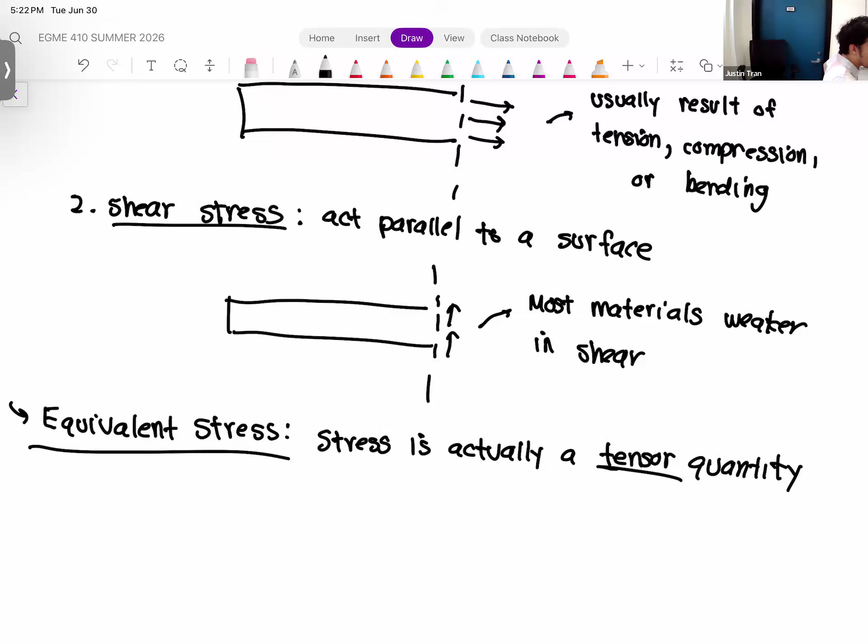A tensor quantity basically means that we express the stress as a matrix. It goes beyond a vector, right? A lot of variables and concepts you've probably learned in terms of displacement, velocity, forces — those are all vector quantities. Stress actually goes one step further than that and expresses it as a matrix. And so mathematically, if you were to look at the stress at any given location, we can define it as this 3x3 matrix.

And so it has 9 components. We have sigma xx, sigma yy, sigma zz, and then we have the shear stresses, which is tau xy, tau xz, tau yz. And the whole thing is symmetric, right? So all the shear stresses are symmetric across the main diagonal. If you wanted a full picture of the stresses, this is kind of what you would express. But in reality, something like this is very cumbersome to express.

So this tensor here, this matrix, expresses all of the different components of the stress as well as all their different directions. We have normal stresses in the x direction, y direction, z direction, and then shear stresses in all the different directions as well.

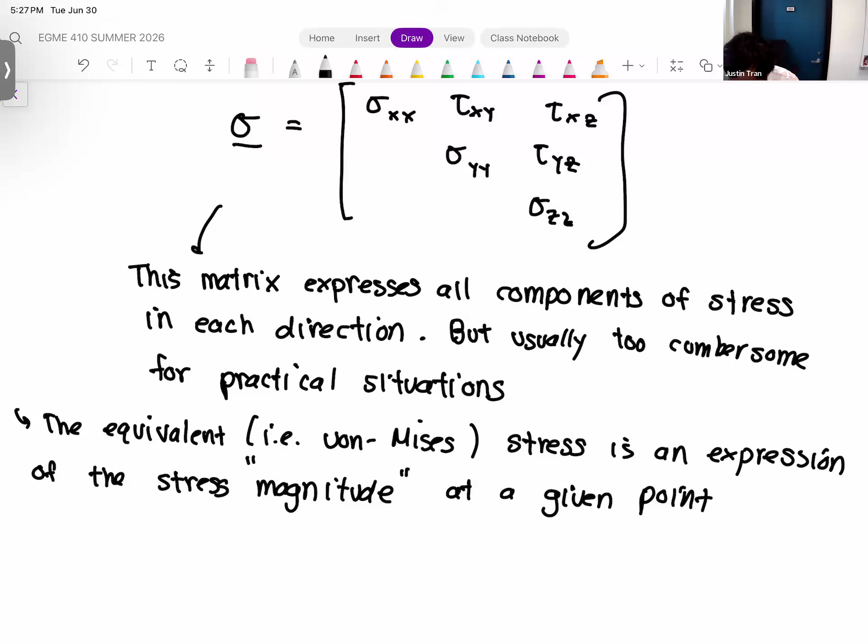Okay, so the von Mises stress, the formula for that is the following.

So you don't really need to know this formula. It's just useful to know in terms of how the von Mises stress is related to the stress components. But it is useful to know.

All right, so the square root of one half. We have the difference of all of the normal components of stress. So we have sigma xx minus sigma yy quantity squared, plus sigma yy minus sigma zz quantity squared, plus sigma zz minus sigma xx quantity squared. So we're basically taking the difference between all the different normal stress components and squaring them.

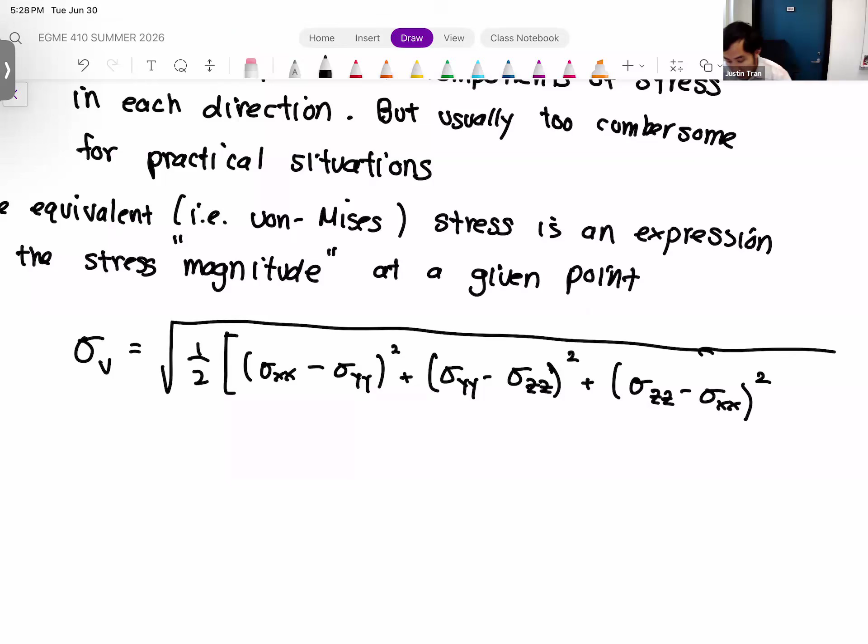Then we add all the shear components as well. We add 6 times the shear components of tau xy squared, tau xz squared, tau yz squared.

And all that is under the square root. So again, this is a formula that we're never going to plug into or use in any calculation for this class. But the idea is that we're taking all of the components of stress.

We're plugging into a formula like this, and then what we're obtaining at the end is one single scalar value for the stress, which is essentially the magnitude of the stress that we're going to be using.

That's kind of the purpose of why we compute this von Mises stress, instead of looking at all of the different components of stress, which you can do, right? I say it's cumbersome, but it's not like it's impossible.

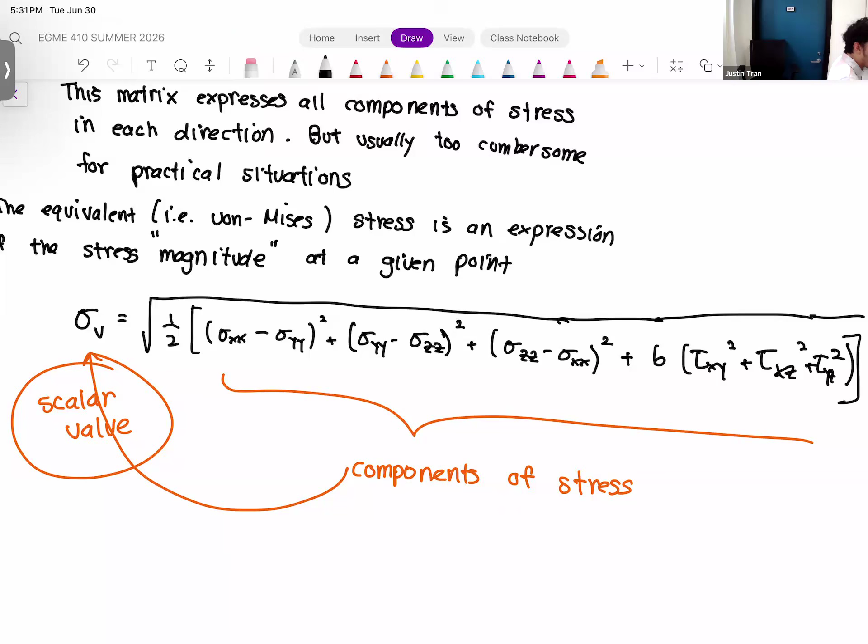So the von Mises stress also has another application. We won't see this in activity 1, but we will do this in activity 2, probably next Tuesday. The von Mises can be used to predict whether a part or whether a structure is going to fail under a given load.

So that's what's known as the von Mises failure criteria.

We're going to talk more about stress-strain relationships in a little bit, but for this part, you should know that at any given point, for any material, there is a maximum amount of stress that it can withstand before the entire material just breaks apart.

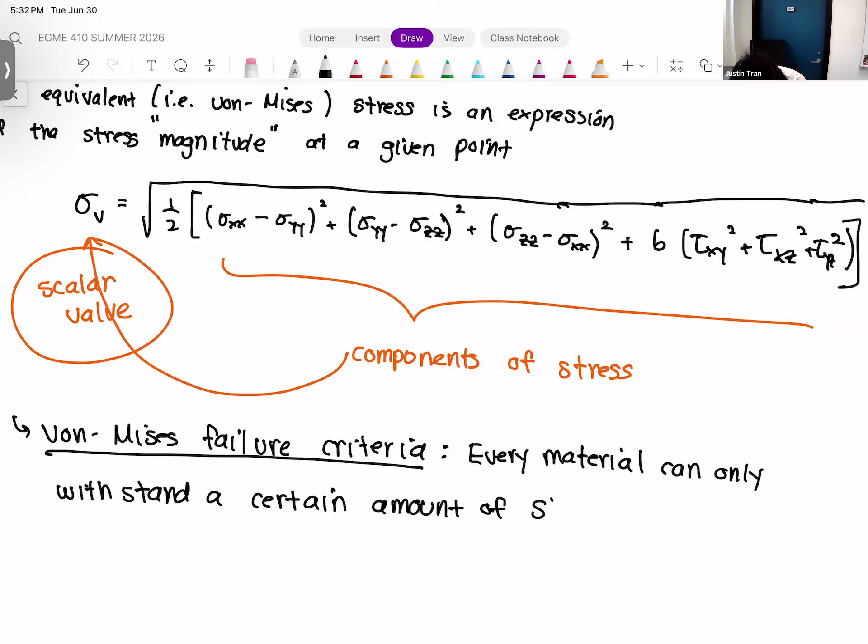We kind of understand that anecdotally as well. You take a structure, like this pen — if you apply enough force to this pen, the pen is eventually going to break, because the material the pen is made out of can only withstand a certain amount of force.

So mathematically, the way that we predict that is through failure criteria. Every material has a certain amount of yield strength, which you can interpret as the maximum amount of stress it can withstand before it will start to fail.

One very common use for finite elements is to determine whether your part is going to fail or not if you expose it to certain forces.

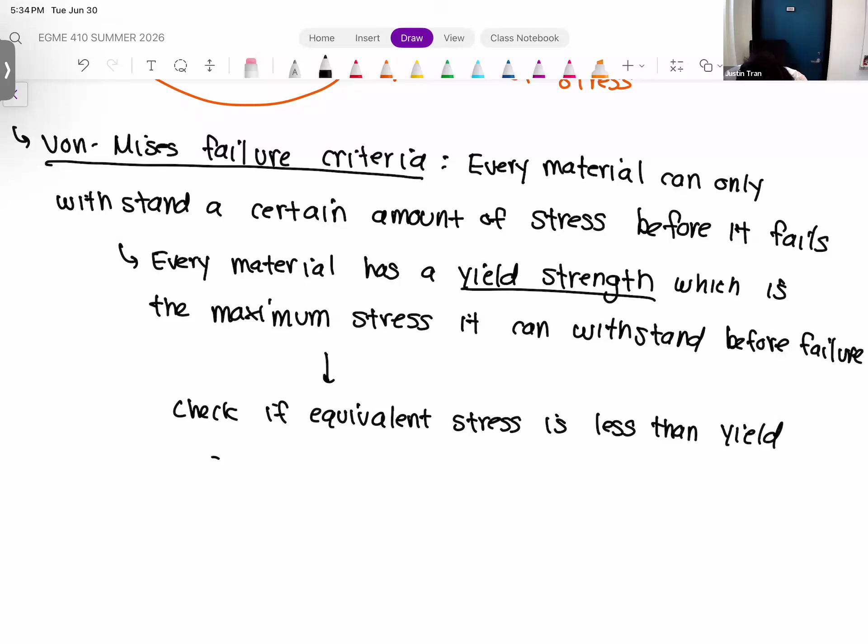All right, so one thing we're going to be doing in activity 2 is we're going to be running a simulation. We're going to check the equivalent stress, and we're going to compare that to the yield strength. And then based on that, we're going to make a statement of whether or not we expect this part or the structure to fail or not.

Now, this is a very simplified way of looking at it. In reality, between our structure being good and our structure failing, there's a lot of complex deformation that occurs along that way. So we're completely ignoring the fact of plastic deformation. I wouldn't say this is the most elegant way to compute this, but it's always good to give you a good ballpark estimate.

Because a lot of times, you're designing a structure for the first time, you're really not sure if the structure is going to survive or not. Using this von Mises failure criterion will give you a sense of, okay, we're way off, or maybe we're pretty close, or maybe failure is not something we're worried about at all.

And so, if you're on a borderline case of whether the part's going to fail or not, probably you need to include more physics, you need to include more plastic deformation, but the von Mises failure criterion is a good starting point. And it's the one, just because of its simplicity, that we're going to use a lot in this class. Any questions on this?

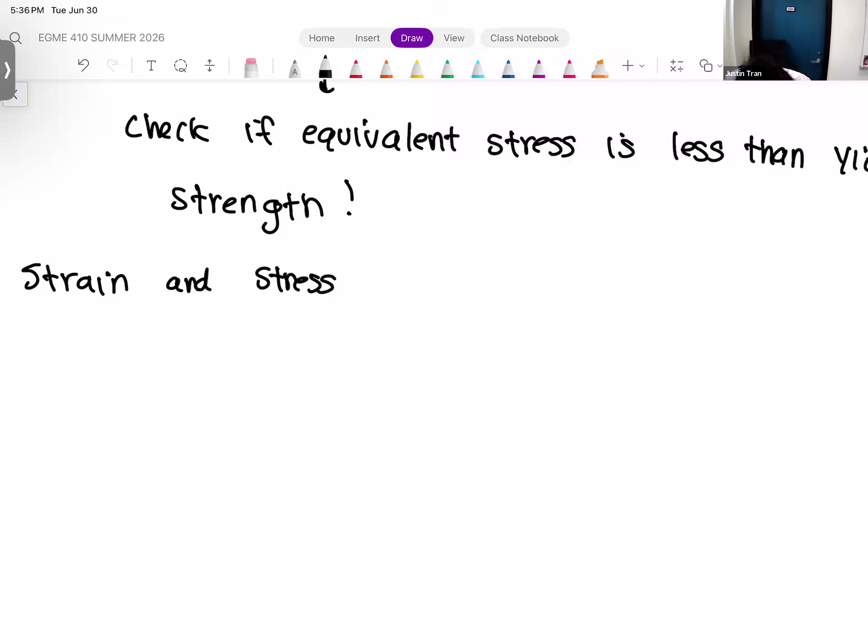So strain, probably as you know, is a way to express how a structure is going to deform in response to external loads. So we've discussed the force response. Stress expresses the force response that a structure must undergo in order to maintain a static equilibrium. But the deformation that it undergoes as well is often expressed as strain.

So strain is a very interesting quantity because it's unitless. It doesn't have any units. It's expressed as kind of a relative change in terms of the new deformed geometry relative to its undeformed geometry.

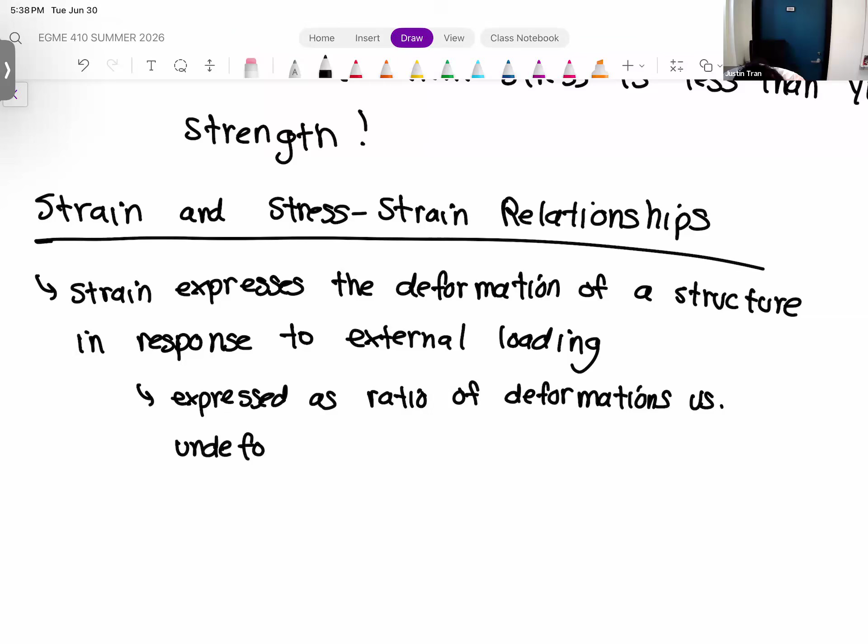All right, so I think the most simple definition for strain is to use just a one-dimensional case, although strain is extrapolated for 2 dimensions and 3 dimensions as well. Let's say that you have a one-dimensional rod. Your rod here is fixed against the wall, and then we apply a force to it. As a response, we know that this rod is going to deform.

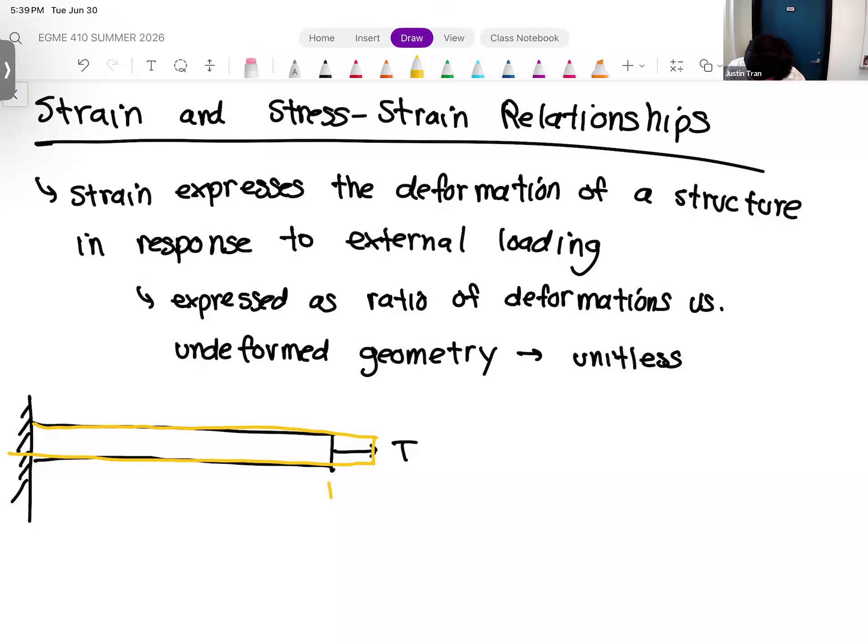In this case, we do expect the rod to lengthen in response to the applied load. Let's say it lengthens by an amount delta L. So what we say is the strain, or epsilon, is equal to the change in length delta L divided by L, which was the original length. Both quantities there have the same units, units of length, so we take the ratio and get a unitless quantity. That unitless quantity is an expression of the ratio of the change versus the original geometry.

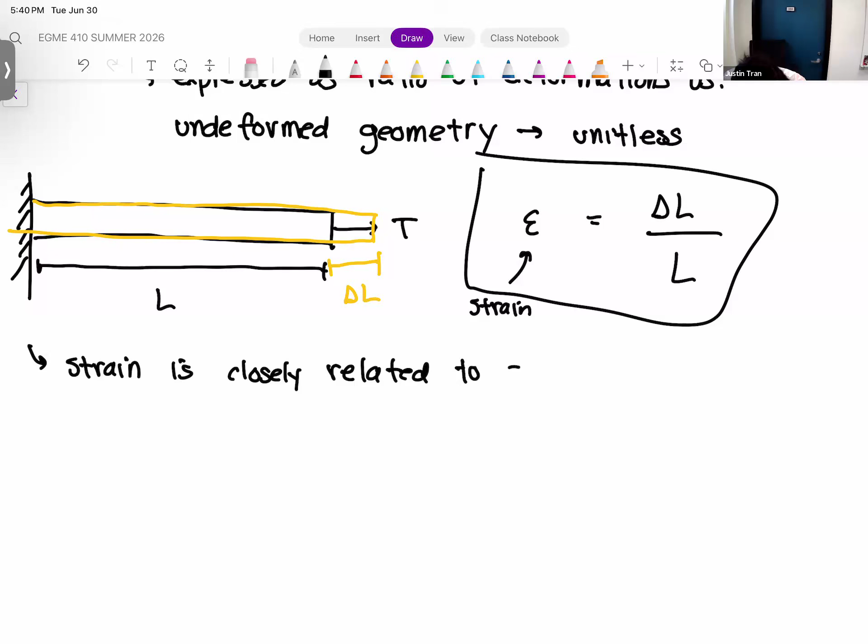All right, so stress and strain in a material are intricately related. You can't have one without the other. If you have strain, that means you have stress, and if you have stress, that means you have strain. Now, the exact mathematical relationship between stress and strain will depend on the type of material you're looking at. Some materials have a very simple linear relationship between stress and strain. Some materials have a complex nonlinear relationship - those are more nonlinear materials. And even for very simple materials, the stress-strain relationship changes depending on the amount of strain that you have as well.

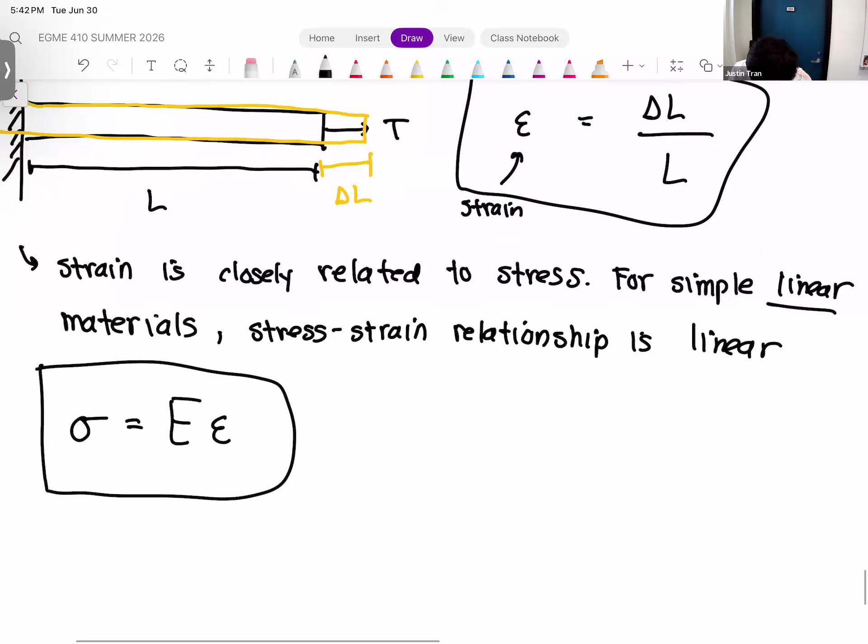But in a very simple case, for very simple linear materials - these are very simple materials like your metals, mostly metals - this is probably the first kind of equation that you've learned in solid mechanics, which is that stress in a material is equal to the Young's modulus E multiplied by the strain. This E, of course, this is what we call the Young's modulus.

And accompanying this, you've probably seen this plot before as well. So on the horizontal axis, we have strain. On the vertical axis, we have stress. And the relationship between them is linear, where the slope of the line is the Young's modulus.

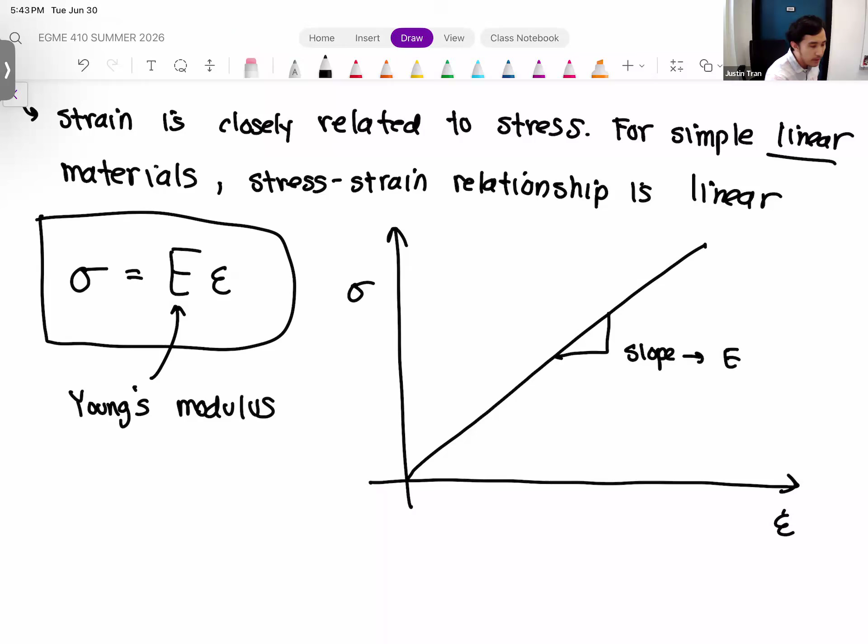So that stress-strain relationship tells you, for a given amount of strain, we're going to have a certain amount of stress as well. I bring this up just to define the Young's modulus a bit better. This is a very key material property.

Aluminum is going to have a certain Young's modulus, which is different than steel, which is different than balsa wood, which is different than rubber. So depending on the material we're using for the simulation, we need to define the Young's modulus appropriately. What does it represent? The Young's modulus represents how stiff the material is, or how resistant it is to deformation.

Visually, you can see that as the Young's modulus changes, it's going to change the slope of that line. Physically, intuitively, the way I always think about it is the stronger the material is, or the more stiff it is, the higher the Young's modulus is going to be.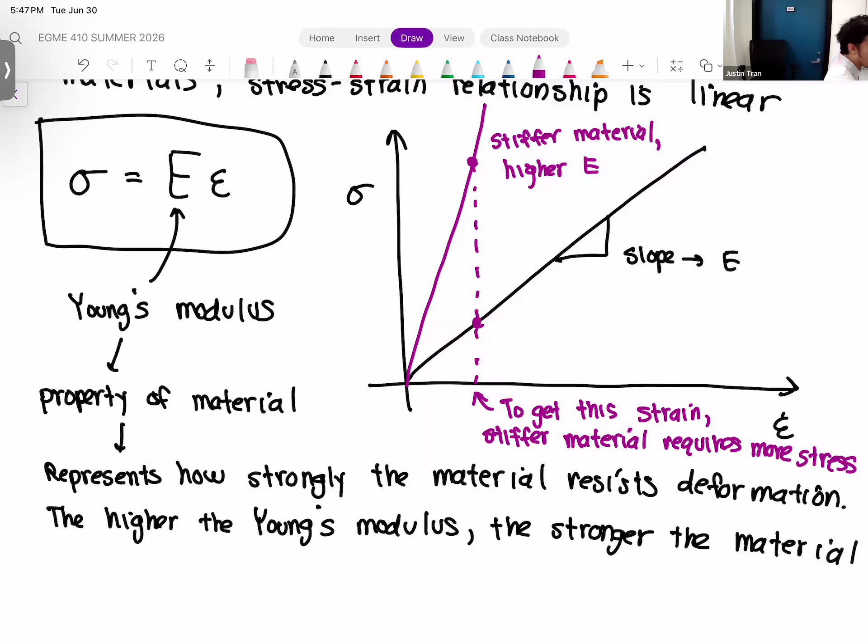So Young's modulus is a very important material property. We're going to be using it a lot in our simulations, so it's good to understand what it represents for these materials and situations. Any questions on this?